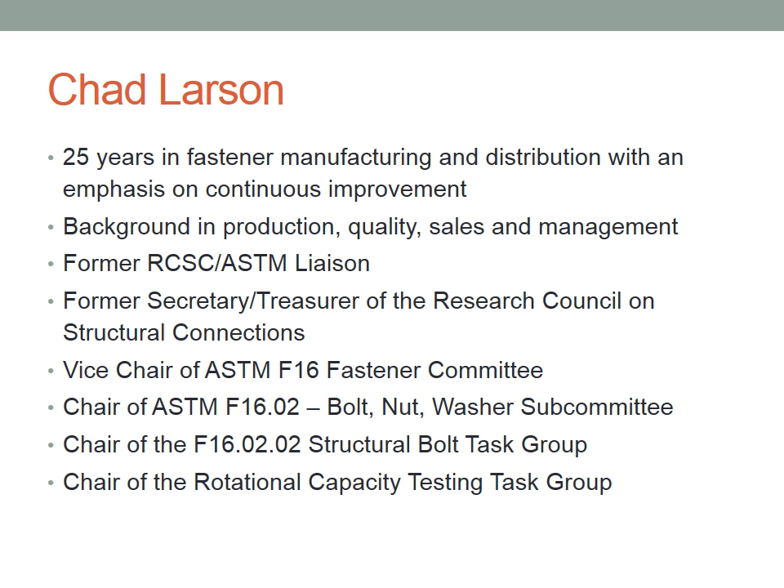It's truly a pleasure to be presenting for all of you today. I will be covering a number of topics today. Here's sort of a list of what we're going to be talking about. And we're not going to be covering a lot of topics.

Bolting is a pretty complicated issue, and most of the things we're going to be touching on are in and of themselves hour-long to day-long seminars to truly understand, but I'm hoping to skip just enough across the surface of these that you can have a chance of coming away identifying areas that maybe you should know a little more about based on your own circumstances, as well as some useful in-depth information on a few important topics as we go along, the items that we tend to see the most issues with as a supplier.

What we won't cover, what we simply don't have time to get into, are some things that you can definitely find information on in other places. As we get to some points of that throughout the presentation today, I'll give you some ideas where you can get that. But certainly there's a wealth of information out there in the form of formal educational programs, all kinds of information on the internet, and all kinds of people that are willing to do additional training to give you more information on any one of these topics.

What I do want to make clear is I'm going to talk about a lot of problems, a lot of potential problems, a lot of things that engineers can put in place to try to avoid having situations arise at a job site. What I don't want you to leave this call with is this feeling of panic from having seen these problems. By and large, we have very few bolting quality issues in the industry relative to the number of fasteners that are used.

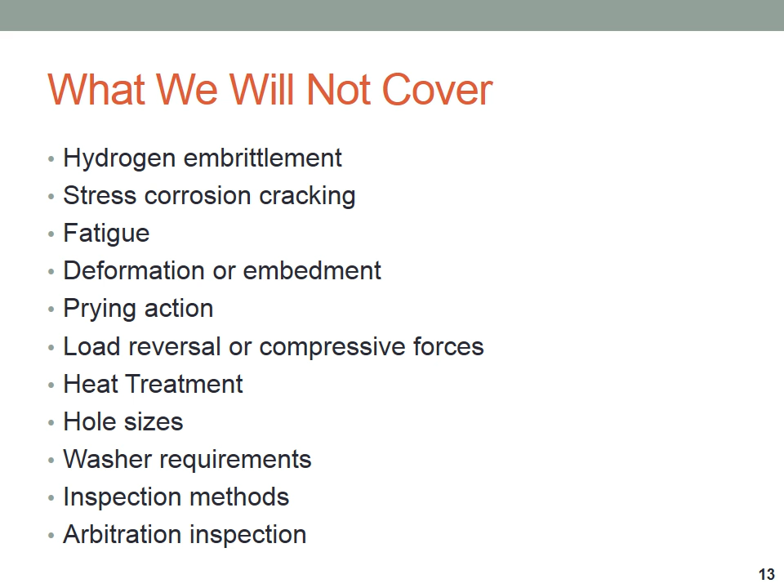There's no need to run from this presentation thinking that some structure you designed is going to fall down. It's simply to give you a better understanding about bolts.

One thing I would recommend, Geoff Kulak, I think 3 years ago, gave a presentation on bolted connections and how forces act on bolted connections. Now that is still available on the AISC website, and I would encourage you after this, if you didn't participate in that, to possibly go out and grab a copy of that. That's some good information that is left out of my presentation simply because it's available there, and I didn't see the need to spend some of our time going over that.

Why should you know some of the things that we're going to be going over today, and what does it matter to you as an engineer? It's my opinion that understanding bolts is really going to help you make more informed engineering decisions up front. Understanding bolts will help make your intentions and requirements clear downstream, clear to the fabricator, clear to the erector, clear to the ironworker. Making informed decisions up front can really help you decrease the likelihood of any problems that might come up down the road.

Key for me in all of this is preventing problems prevents compromise. What I mean by that is buildings go up with problems and they go up without problems. We see situations, not just with fasteners, but throughout construction in general, where things come up and people have to make a determination on whether something is fit for use. It's not often that an owner wants to wait an additional 12 weeks for a casino to open because some special bolt that got ordered was found non-conforming and needs to be reordered and remade. There typically needs to be points of compromise where you need to know at least enough about the subject matter to not feel like you are risking the integrity of a structure by seeing something as being fit for purpose or fit for use. Understanding a little more about every element in your craft is very important to that end objective, and fasteners in particular are one of those little thought of last use items that oftentimes are in situations like that.

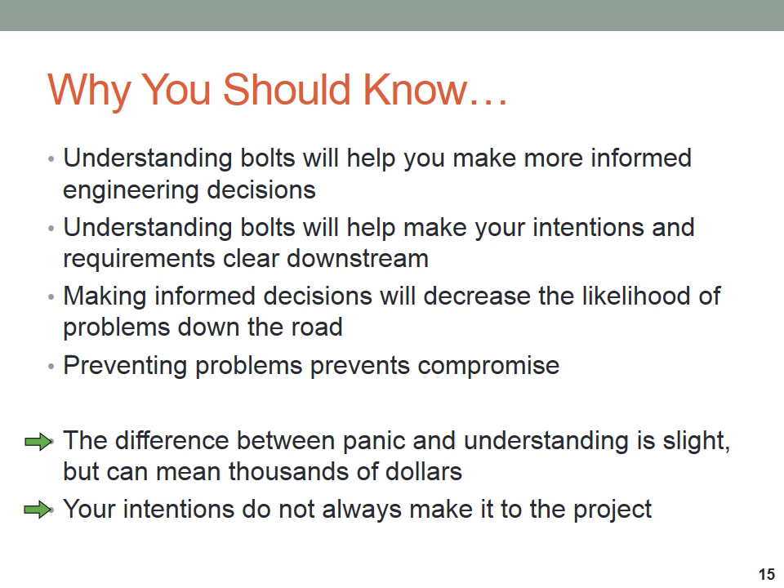I think it's also important to recognize that however good your intentions may be, your intentions don't always make it to the project. Oftentimes bolts get out to a job site with very little oversight, little QC if any oversight. And you need to find ways to make sure that your intents are carried all the way through to the end use of the product.

A little bit about structural bolts and how they work in connections. A bolted connection really takes an army of people: AISC, RCSC, and ASTM. Essentially, components of each of those need to be put together to have a properly designed connection.

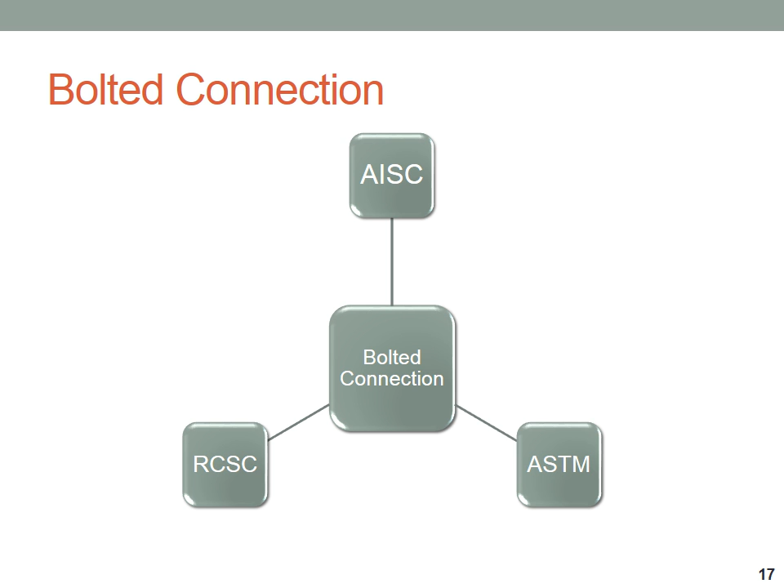AISC, since you all have found your way to this talk and to the website to get information on it, assuming everybody on the phone here is familiar with that, but obviously the American Institute of Steel Construction is sort of the steward for steel construction and responsible for promoting steel construction in our industry.

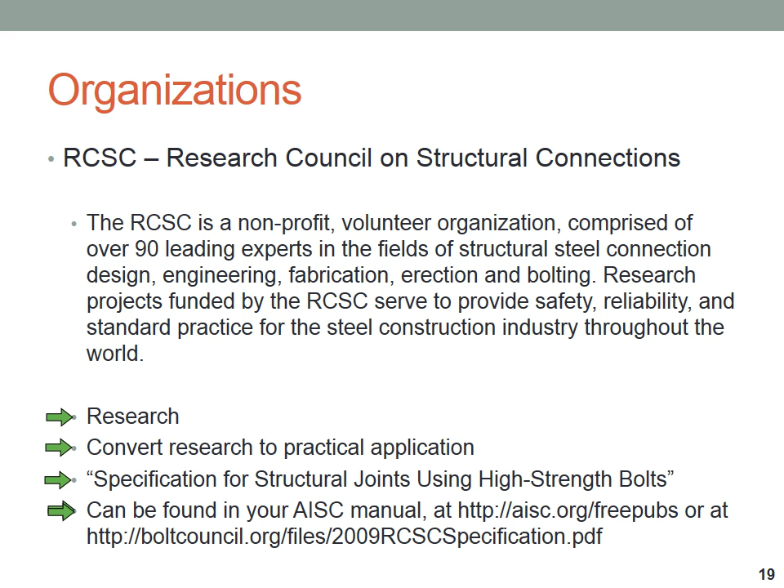What maybe not all of you are aware of is the Research Council on Structural Connections. That is a nonprofit volunteer organization essentially charged with doing research, converting that research to practical application. So it's one thing to have data and information, it's another to make it work in the real world. That committee maintains and publishes the specification for structural joints using high-strength bolts. That document can be found either in your AISC manual, on the AISC website, or on the Bolt Council website. Those links are there available for you.

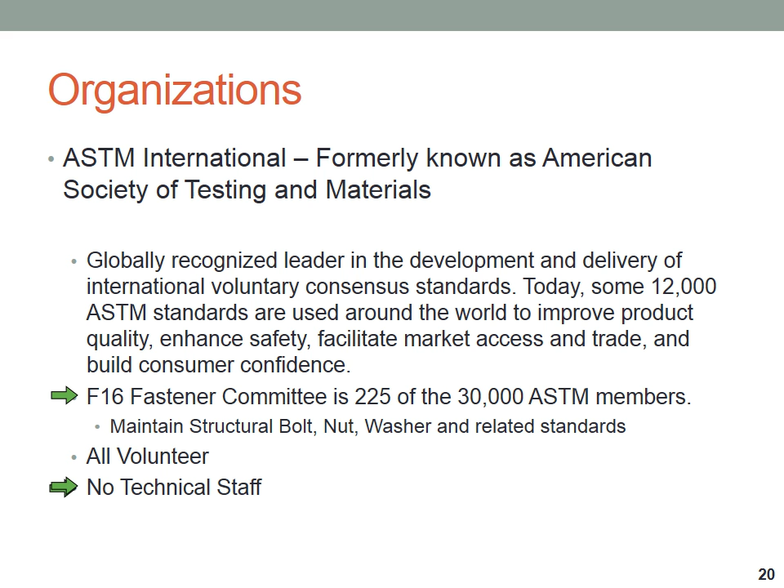ASTM, most of you may be familiar with the term - it's actually called ASTM International. It's really the world leader in the development and delivery of consensus standards. What that means, at least for the purposes of this phone call, is that there's an ASTM committee, the F-16 committee, which is 225 of the 30,000 ASTM members. Those 225 people are essentially all volunteers that maintain the structural bolt, nut and washer standards. It's important to remember, a lot of people don't understand that ASTM, being a volunteer committee, there is no technical staff. They essentially rely on committee members to answer any questions that might come into ASTM.

Recognizing that these are volunteer organizations, recognizing that a lot of needed changes don't happen right away, it's important to recognize that these organizations are never really aligned in real time. In fact, sometimes they are as much as 5 or 6 years apart. If a new coating, for example, gets into an ASTM standard, if it just missed a publishing date for the RCSC spec, it may be 5 years before those are aligned. It's important to recognize that sometimes the industry moves at a pace that's quicker than our standards can keep up with it.

So a little bit about how nuts and bolts are made.

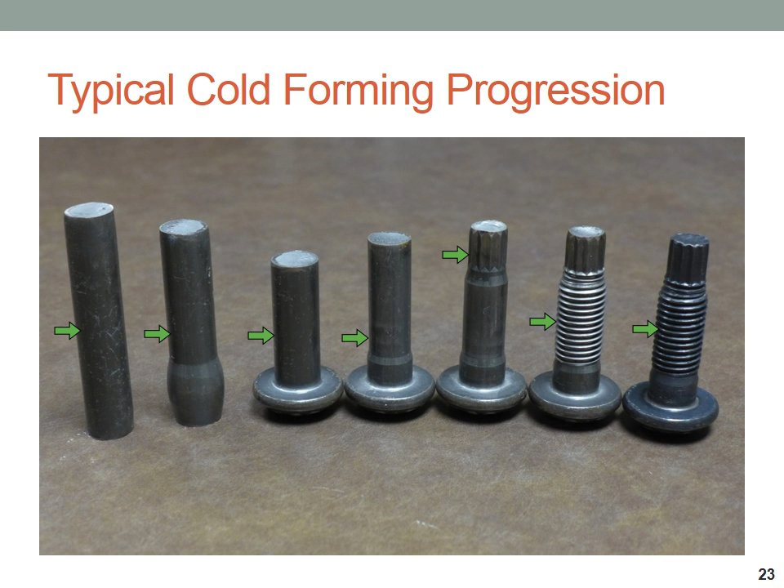Not going to get into a terrible amount of detail here, but I think it's interesting for people to see the process: going from a wire rod or coil to an upsetting stage, to a heading stage, to an extrusion to create a pintail (if needed on a twist-off type bolt), thread rolling, and heat treatment. This is typically done in a cold forming operation, used to make thousands of configurations of parts.

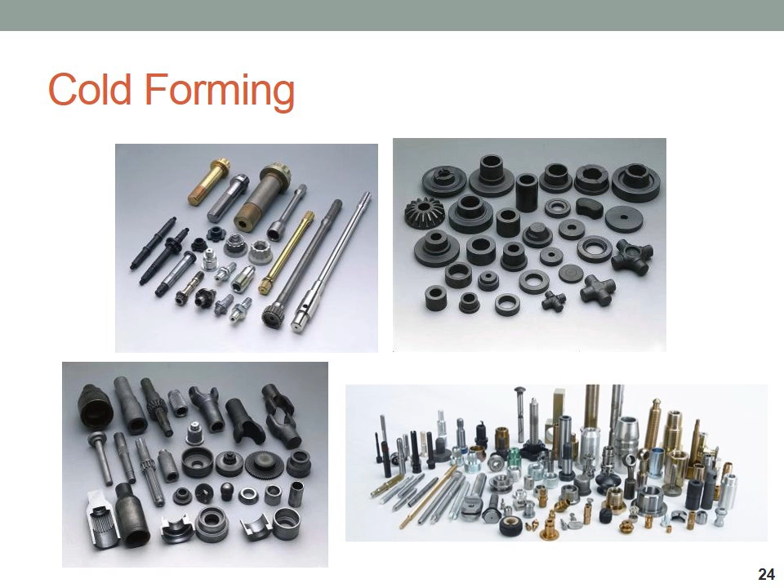The cold forming process may have a few tweaks from manufacturer to manufacturer, but generally follows this flow: from steel coils to an annealing process, to pickling or cleaning and coating. The wire is then drawn down to size, cold formed by heading and typically roll threading, then quenched and tempered as a heat treat process, plated or coated as required, inspected, and then packaged.

It's important to recognize that to really understand cold forming, you probably need to spend a couple of weeks in a class to really grasp it. Inspection in particular has a lot of elements in inspection and quality assurance that need to be well understood. Thankfully, most of your contractors and suppliers are taking care of all of those issues.

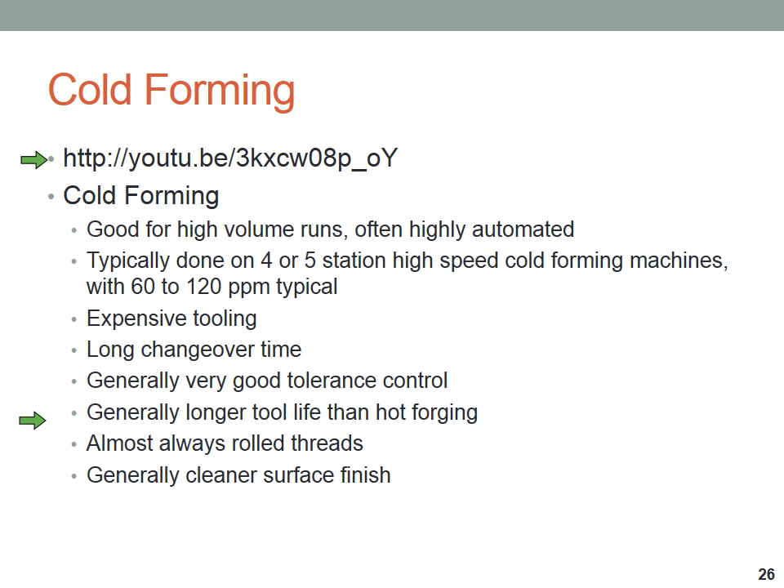This is just a little bit of information on cold forming, what it's good for, and a little bit of information on hot forging, which is very similar to the steps I just showed you outlined for cold forming, but it's done at an elevated temperature at a point where the steel is very pliable and relatively easy to form.

There are advantages and disadvantages to each of these, and without getting into a lot of detail, I've provided some of these for your review. In particular, hot forging is really good for long lengths that don't necessarily fit in machines, or for large sizes that would require a lot of forging pressure if cold.

In most cases, hot forging is a pretty manual piece-at-a-time process, with a few exceptions. Cold forming, on the other hand, is a very high volume automated process.

The thing to recognize about hot forging is sometimes those bolts are made from blanks to speed delivery. What I mean by that is a manufacturer may make a 1.5-inch diameter by 2-foot long blank, and as orders come in, they can cut inches off of that and then thread the part to meet certain delivery requirements without necessarily having to set up to make every specific length.

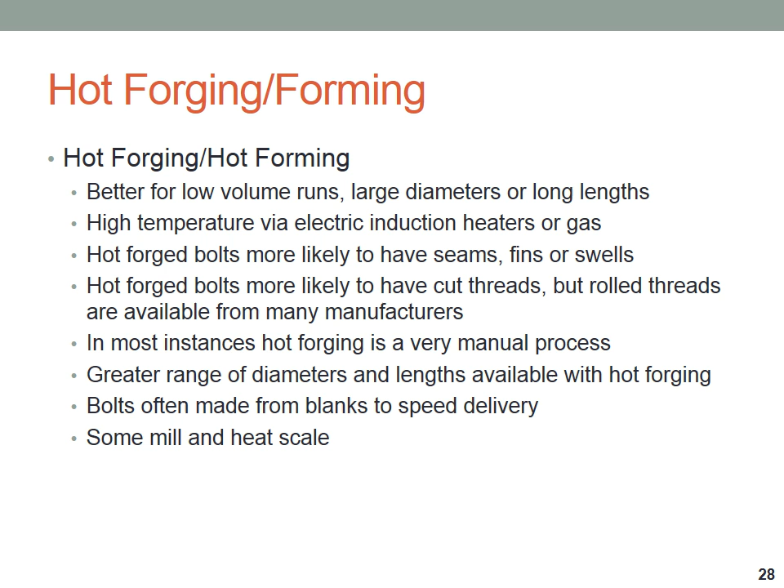Threads are formed in two ways, typically thread cutting and thread rolling. Thread cutting is self-explanatory, typically done with a chaser or almost a lathe type of setup. Thread rolling is done with two dies that have the profile of the threads included, and basically under very high pressure, they roll the threads into the bolt, so there's no cutting.

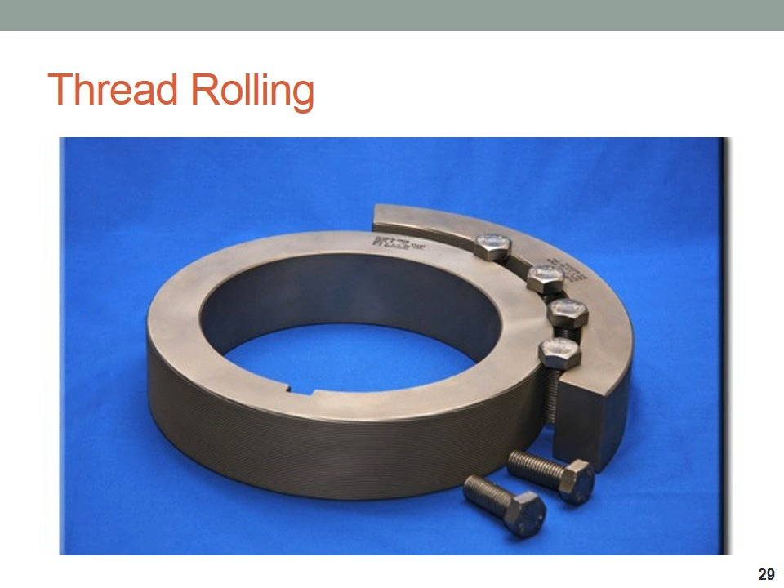There are some advantages to thread rolling. There's a little bit better strength because of the cold working, and the grain flow is maintained rather than cut away.

Nuts are made similarly. Here's a picture of a progression that shows nut forming. Typically in structural bolt sizes, all of the diameters of nuts would be what we call hot formed, again at very high temperature, with a cut-off blank, an upset, a partially formed hex shape, a pierced blank, and then a tapped final product with heat treatment, depending on the manufacturer, going on at different stages throughout that process.

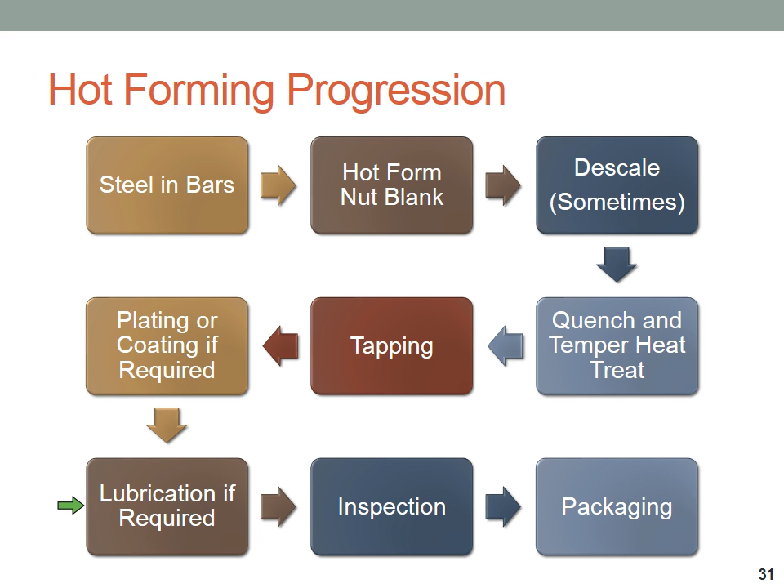The progression for hot forming is very similar to cold forming, including a couple of different steps, possible descaling depending on the end use of the product, but the same process for quench and temper, tapping rather than rolling, and plating, lubrication. We do have specifications that require lubrication in a number of cases for structural bolts, so that's one of the key components to nut manufacturing.

As far as bolts go in general, beside how they're made, there are some universal thoughts on things that you should understand about bolting. Here are some basic terms that I think most of you are familiar with, including clamp force.

Elastic interaction is the way multiple bolts in a joint interact together. As you tighten one, the ones around it loosen. A good example is putting the wheel nuts on your car. You go around and tighten them once, then come back to the first bolt and it's loose. That's an interaction between all the fasteners in the assembly, and for us, that mostly happens during the snugging process.

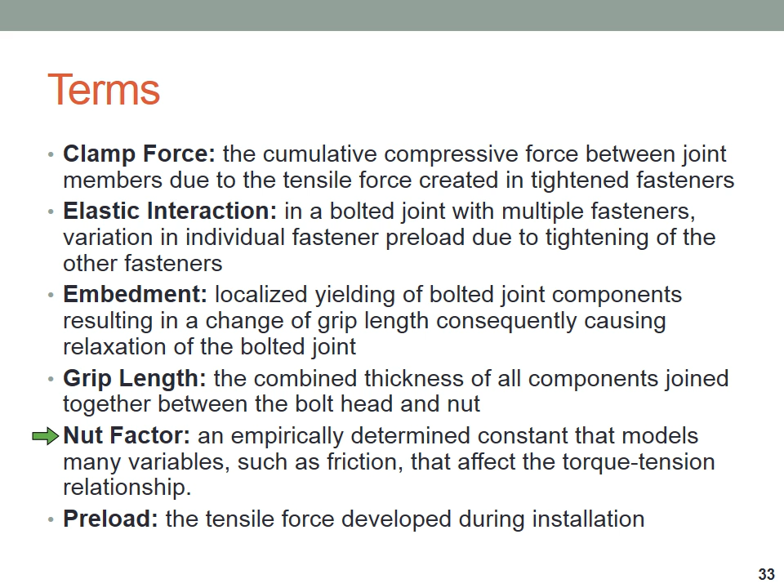There's a couple of things I'd like you to take away from the talk today. In particular, just understanding the curve. I think you've all seen at one time or another stress-strain diagrams on different materials, including fasteners. Understanding the curve is really essential to understanding how fasteners work, and understanding threads is essentially how fasteners function and maintain their strength. Those are a couple things I'm really going to try to drive home today.

Bolts typically function very much like this stress-strain diagram, where we've got stress and strain. What we call the linear range, or elastic range, is the tension we can reach in a bolt up to the yield point, or the point where it deforms plastically and permanently. In this elastic range, at any point along this line we can tension a bolt, release the tension, and it will go back to its original length.

We could bring a bolt all the way up to its proof load, or a typical clamp load, relieve the tension, and it would go all the way back down to its original length. Some structural bolts are installed in that elastic range, but a very large majority of them, particularly bolts installed using the turn of the nut method, are actually pulled well up into what we'd call the plastic range, meaning there's some permanent elongation. It would be very typical using turn of the nut to bring a bolt all the way up to the peak, or ultimate tensile, possibly even farther.

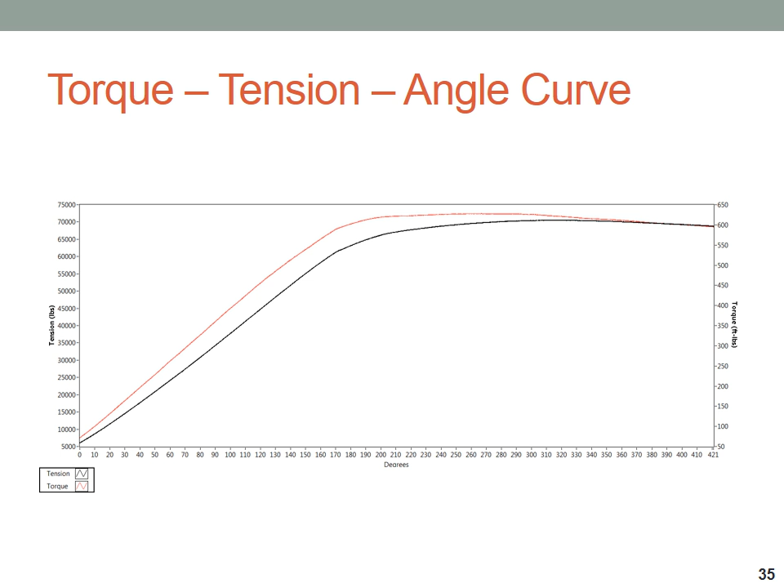There's a lot of information we can gather by doing a torque tension angle curve such as this. And the technology we have today allows a lot of people to look at that information, not quite in real time in the connection, but certainly in fastener testing.

Some bolting basics you should understand: nuts should always be stronger than bolts. That's sort of a universal truth. The reason is we prefer that bolts fracture rather than strip. Stripping is a condition that could happen in a connection, and you wouldn't necessarily know you had compromised it. Tensile failure is sort of immediate and in your face, and it at least tells you something has gone wrong.

Generally speaking, the more bolt threads there are in the grip, the better. Bolts are essentially very stiff springs. Most of the stretch that occurs in a bolt under high tension is in the area of highest stress, or smallest diameter, which is in the threads. As a bolt is tensioned, most of that stretch happens in the threads. If you haven't left very many threads within the grip, you're relying on that small number of threads to do an awful lot of elastic stretch, and sometimes they don't have the capacity.

Generally, we like to see more threads available within the grip in a well-designed bolted connection, but structural connections are unique in that they have design considerations for keeping threads out of shear planes, and therefore keeping threads short. The thing to take away is, if you're trying to detail a bolt length and deciding whether it's better to have two or three threads sticking out or only two or three threads in the grip, honestly move the nut out towards the end of the bolt if you can and leave more threads in the grip. It'll generally provide for better bolting performance.

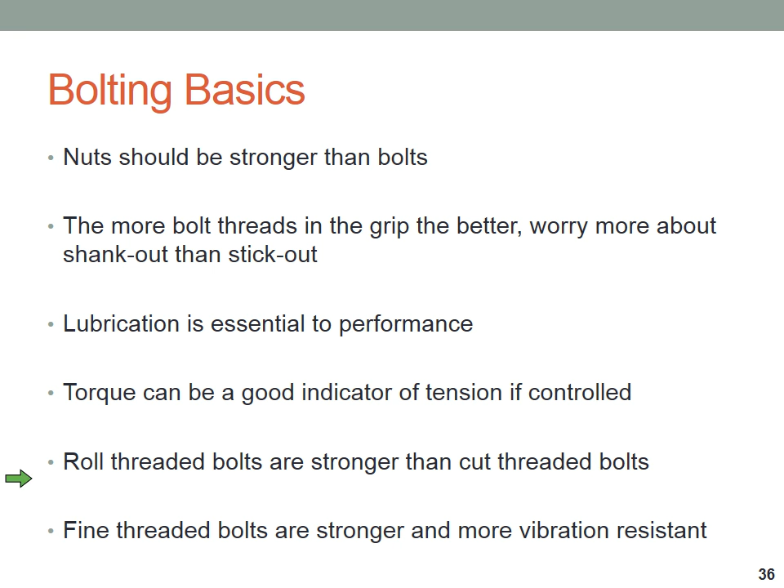Rolled threaded bolts are typically stronger than cut threaded bolts. Fine threaded bolts are stronger and more vibration resistant than coarse threaded bolts.

Large diameter parts are more difficult to heat treat properly. When we get up around 1.5 inch, 2 inch diameter, it's sort of like cooking a really thick steak. It's hard to properly heat treat a part because it cannot quench at the same rate, so the core of the part tends to be much softer in hardness while the outside tends to be much higher in hardness, making it difficult for the part to uniformly distribute load. We tend to get a little nervous as parts get larger, because they become much more difficult to heat treat, and heat treat is essentially what gives us all the properties of a fastener.

For large diameter fasteners, you also have to consider that they're typically hot formed, and those can come with die fins and some tooling marks. Long bolts can be difficult to keep straight through the heat treating process. If you're trying to get through 18 inches of steel with a 1/16 of an inch oversized hole, sometimes that can be tough with really long bolts.

Another universal truth for fasteners is that most of the stress in an assembly is on the first few nut threads nearest the grip. That's just how the load is distributed. It's important to understand that many quality problems are a result of heat treatment and thread fit, and that's why we typically spend so much time in the fastener world talking about that.

As I mentioned, torque can be valuable, but it's complicated. It's a great means of fitting up and snugging structures. It can be accurate when it's controlled.

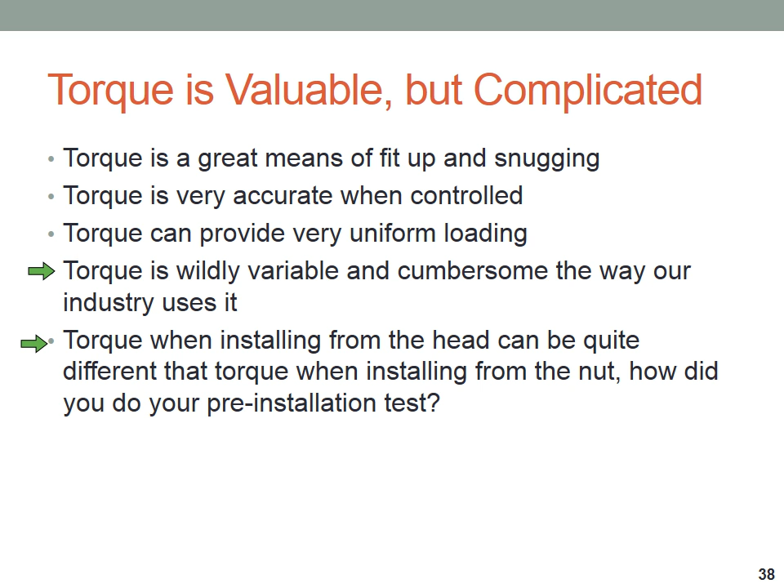It can provide for very uniform loading, in particular, again, in the snugging process. It is, however, a little bit wild and variable in the way that our industry uses it. Sometimes we have bolts, nuts, and washers from different sources showing up at a job site, and we truly don't know what's going to happen to torque in that situation. And torque when installing a bolt from the head can be quite different than torque when installing from the nut side. So it's important to recognize that.

Threads are very important. Obviously, without threads, fasteners are pins, right? It's what makes nuts and bolts work. And it's important to have a little bit of an understanding of how screw threads function. There's actually over 120 different elements to screw thread design. It's incredibly complicated. Thankfully, our standards allow us to ignore pretty much all of those, but there are a few things that are important to understand.

Inch series structural bolts are always what we would call a unified coarse series of thread and a class 2A tolerance. As I mentioned earlier, threads do not load evenly, sort of like very long connections. Threads tend to be loaded from the grip out as the bolt starts to stretch. The threads closest to the grip get a disproportionate amount of the load, and it's important to recognize that and what effect that has on design.

Rolled threads can be 5 to 15% stronger depending on the grade of the fastener, but cut threads can easily meet specifications. So don't be afraid if somebody has supplied your project with bolts that have cut threads. They can more than adequately meet the requirements.

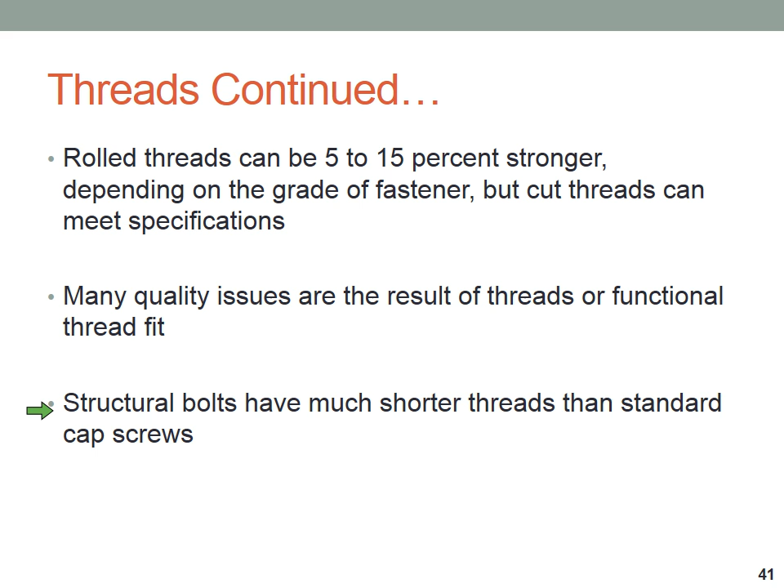Many quality issues that we run into as a supplier are the result of threads or functional thread fit. And what I mean by functional thread fit, it's one thing to have a thread that is perfect coming off of the machine. But after it goes through different coating operations, gets handled, gets dumped out at the job site, thread nicks, coating thickness, things like this tend to have an influence, and we see quite a few problems coming from that. It's also important, as I said, structural bolts have much shorter thread lengths than cap screws.

The root is essentially the bottom of the valley in a thread form. The flank is the side of the thread, either side. The crest is the top. The minor diameter also generally equates to what we would call the stress area on the fastener. The major diameter is often very similar to what we would call the nominal diameter, but not always equal. Thread angle: all of the UNC fasteners that I talked about are 60-degree thread forms.

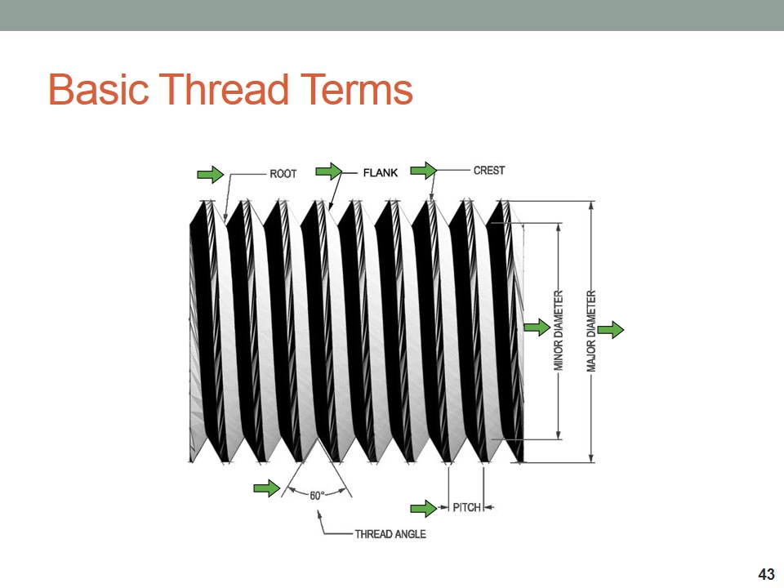And the pitch. The pitch is something that we're going to spend a little bit of time talking about because there's a lot of confusion on what thread pitch is and what thread pitch diameter is. There's a little bit of confusion. So as this slide comes up, pitch versus pitch diameter. In the bolt and nut world, we use pitch diameter a lot. Pitch is very simple to understand, pitch diameter not so much. I'm going to try to explain pitch diameter, but to be quite honest with you, a lot of people in the fastener industry don't understand it. So I'm going to try to explain it in as simple a way as I can.

Pitch is simply thread spacing. So if you ordered an inch series 7/8-9 by 2, that -9 means there are 9 threads per inch, and that is the spacing of the threads. There are, as it implies, 9 threads per inch of length. Metric fasteners do it a little bit differently. They would use an M22 by 2.5 by 40. In that case, they don't do threads per centimeter, for example. They do 2.5 millimeter as the spacing in between threads. So the top of one thread form to the top of the next thread form is the spacing.

Examples then are unified series fine, unified series coarse. You can have the same fastener with a fine thread of 14 per inch or a coarse thread of 9 per inch.

Pitch does not equal fit, however. Implying that pitch equals fit would suggest that you could put any diameter of bolt on any fastener that met the same pitch. A very simple example of that is you cannot put a 1-inch 8 nut on a 2-inch 8 bolt. It simply doesn't work, even though they have the same number of threads per inch. It's very obvious why it doesn't work, and yet you can get each of those in an 8 thread per inch variant.

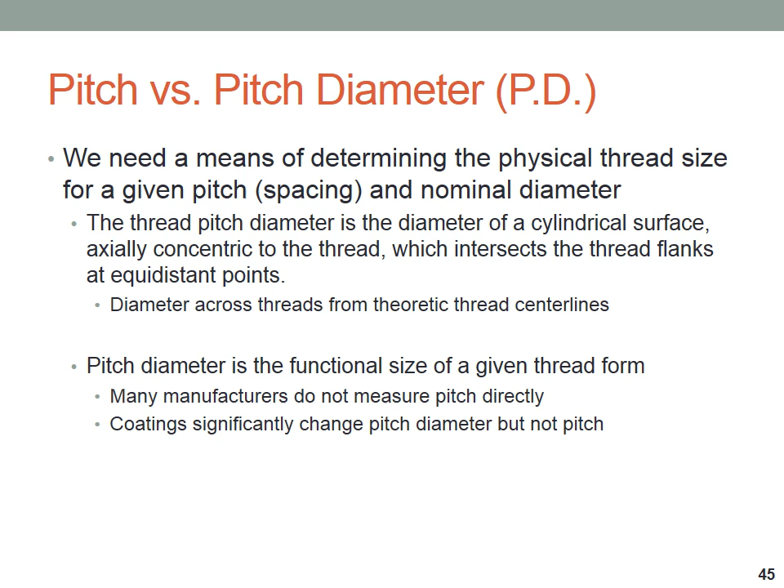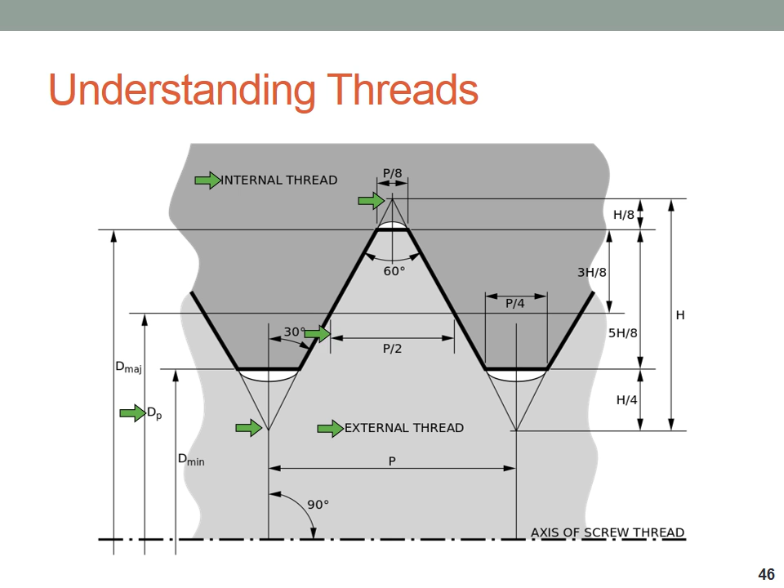Back to this drawing that I had, in this particular case, the pitch diameter, again, is the center line. If you took an equal distance between the theoretic top and bottom of that 60-degree angle, this pitch diameter is a line that travels through the center of that. In this case, though, you can see it's neither the center of the external thread nor the center of the internal thread. It's actually just the center of the theoretical center of those.

Now to measure that, keeping in mind that threads have a helix angle to them, or a screw form to them, in order to measure that diameter, we're essentially trying to measure the distance of these 2 points on a crest, or on a mountain I'll call it, across to the other side 2 points on a valley. The dimension from that point to that point across is what we call a pitch diameter.

And why that's so important to fasteners is we use in the structural industry a lot of fasteners that are coated. These coatings, while they cannot change pitch, imagine hot dip galvanizing a bolt, you don't change how many threads per inch they are, but you drastically change how that bolt and nut interact with each other, and that is a function of the pitch diameter.

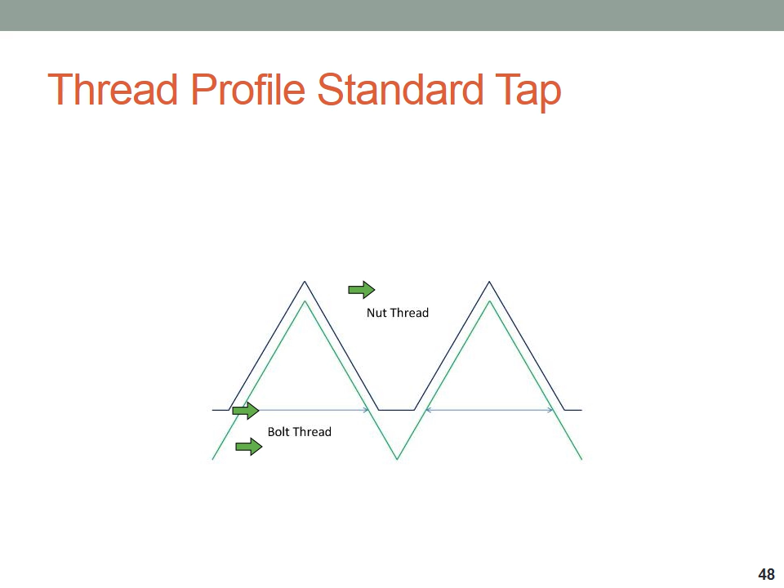Essentially, the strength of the bolt thread then is the cumulative area across this bottom portion of the triangle as it wraps around the threads on the bolt. And so that essentially is the stress area of the thread.

Now, when we add coatings, they have a significant effect, because if you can picture measuring coating on a plate, for example, if you add coating thickness, it has a one-for-one relationship. The coating thickness is the coating thickness. If you add coating thickness to a cylinder, the effect on your cylinder is double the coating thickness, because you're measuring it on both sides.

Since we measure pitch in 4 places, the effect of a coating on a fastener is that it has a 4-to-1 multiplier on the thread fit. In the case of something like mechanical galvanizing, where we are coating both the bolt thread and the nut thread, it actually has an 8-to-1 multiplier. So what starts out as a relatively thin coating, we have to multiply that thickness times 8 in order to come up with its effect on thread fit, and that can be significant.

If you've got a notebook in front of you, many of our coatings are approximately the thickness of a sheet of paper.

That in itself doesn't seem like much, but if you put 8 sheets of paper together, that's the cumulative effect we encounter trying to mate coated bolt and nut threads, and it's important to understand. Here's an example of going from the old nut profile to what we call oversize or overtapped nut thread, to accommodate those coatings. So forget that blue line and look at it with an overtapped or oversized thread, which is typical of virtually every coated fastener we use.

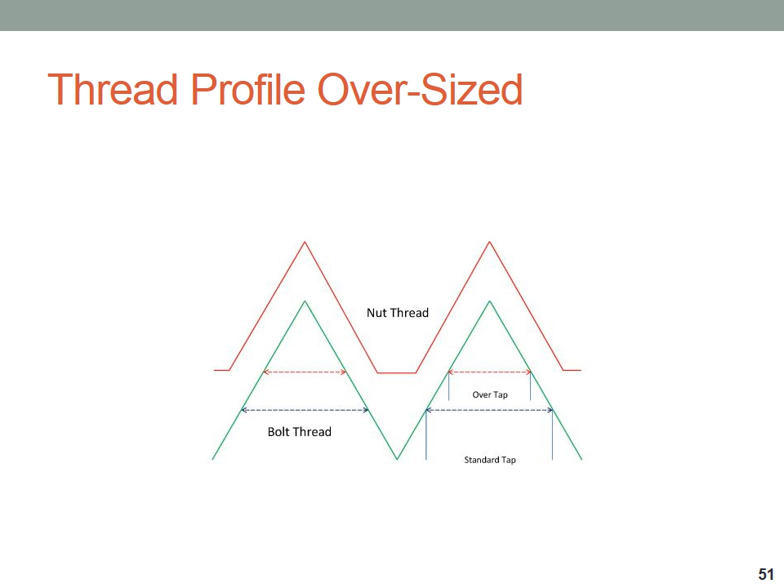As an industry, we don't have a lot of history with oversizing higher strength nut threads and the effect that has on an A490, or what you guys would call a Group B equivalent fastener. We're still sort of learning a little bit about that.

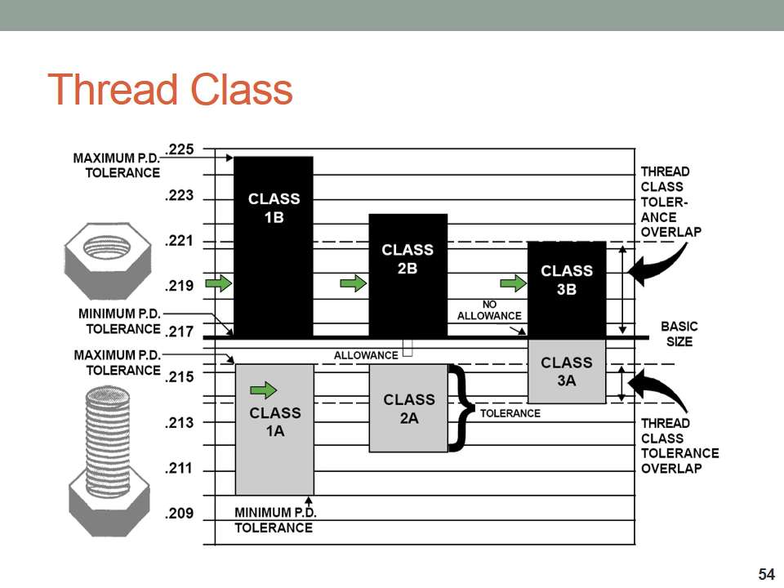I mentioned that fasteners are a 2A, 2B fit. Not going to worry too much about that today, other than to understand there are different thread classes. There are very tight tolerance threads, a 3A, 3B fit, a sort of mid-tolerance fit used on structural bolts, and a loose tolerance, which really isn't used on much of anything anymore. It's also important to understand that these overlap, so even using very simple gauging, sometimes if you measured a thread form you couldn't necessarily tell if a dimension would qualify as a class 1A, 2A, or 3A. What's important to take away is that it's sort of a mid-tolerance, not super well controlled, but somewhat controlled thread form.

Thread lengths, while we like to think they are all equal, it's kind of funny that thread length is not a controlled dimension typically on bolts, at least not on structural bolts. We control the body length, a minimum body length for a given length of bolt, and we control the overall length. We control the transition length, the area in between the full body and the fully formed threads. Honestly, the threads are whatever is left, and that number can vary a little depending on manufacturer's tolerance. For you as engineers, it's important to understand the minimum body length and what effect that might have as you design connections that are either shearing through or not through thread planes.

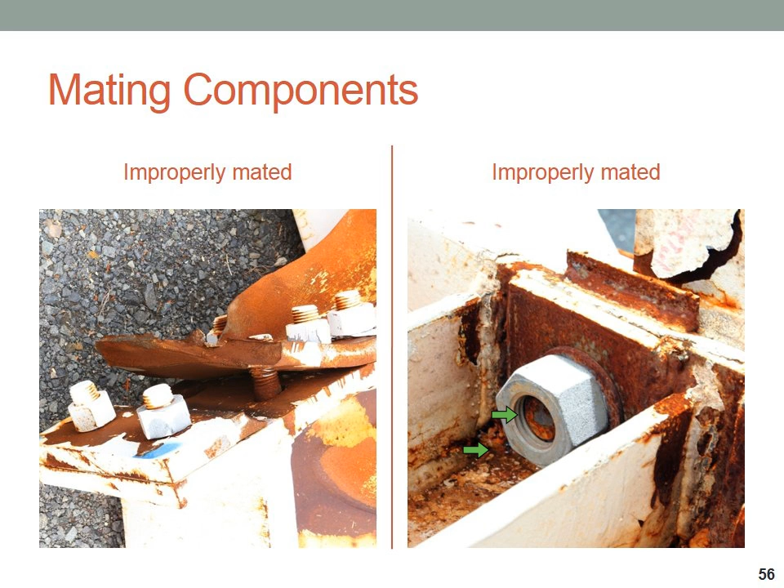Shear. I think pretty much everybody on this presentation is going to understand when we talk about shear.

When you're doing your connection design, one of the first things you look at when designing a shear or bearing connection is whether or not you've got threads in the shear plane. Sometimes it's very simple. In fact, sometimes you can just put your bolt in a connection the opposite direction and increase the shear capacity, because you can get both shear planes to fall on the body instead of one shear plane falling on the threads.

If you have a connection like that, it's super important to make sure that follows through. You may be designing this beautiful structure with all shear and bearing connections, and you've done that so you can stay away from pre-installation testing at the job site. But all of this happens: you send these bolts out and the iron workers put them in the wrong direction, and now one of your shear planes falls into the threaded area rather than on the body.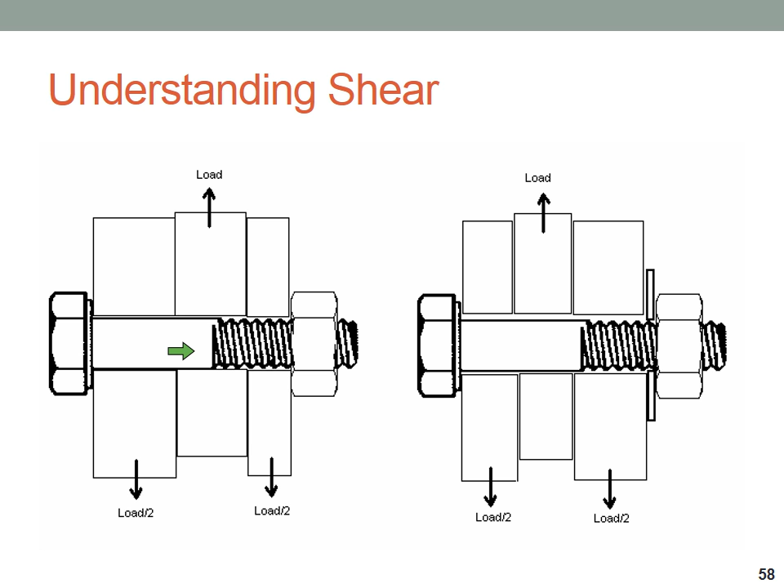It's important to recognize that, and again, make sure those requirements carry all the way through. When you design your connection, you have to stop for a second and think, now what if somebody puts this in the other way? Where does that shear plane fall? And whether you need to provide direction on where those threads need to absolutely be so they don't get put in backwards. Sometimes they'll get put in backwards just because of assembly or installation clearance. The iron workers feel they have no choice, and without knowing the difference, they'll spin it around and put it the other way.

Again, understanding shear, we name bolts things like A325N, A325X. Sometimes that's not understood when it gets to the distributor because it's really a design call-out, not a bolt call-out. The bolt will be exactly the same. The difference is that in an X type, the threads are excluded from the shear plane, and in an N type, the threads are included in the shear plane.

Lubrication. This is one of the things that is really important to fastener performance. We don't require it in every case for structural fasteners. I could make an argument that it should be on every structural fastener, but other people could argue that it's a waste of money and not necessary.

To understand lubrication, we have to understand a thing called K in the fastener industry. I need to be a little careful—there's a K factor within steel design, and there's a K factor within fastener design. Some people call this a nut factor, some call it a friction coefficient. The important thing to take away is that K is simply a way to define the relationship between torque and tension. If we can define that, we can try to make it repeatable, coming up with lubricants or coatings that give us a consistent torque-to-tension relationship. K, however, only works within the elastic range. Once a bolt has gone beyond yield, we can't really use it anymore, so it can only be measured before permanent stretch.

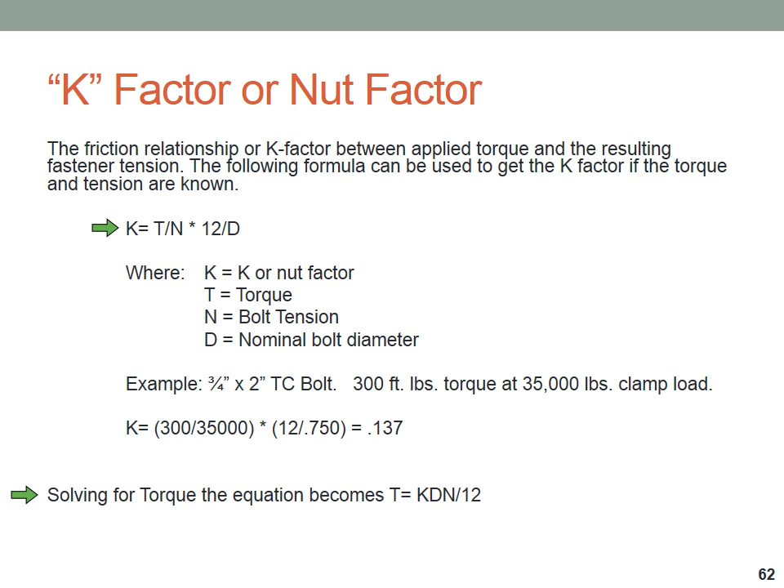The reason I bring this up is we get questions pretty much every week, and I'm sure AISC gets a lot of these too, like what torque should I install a 3/4 by 4 inch bolt to? We sort of laugh because in the real world we have lubricants and coatings that are down as low as a 0.09 K factor, and we have dry bolts out of the keg that have had most of the oil drip off. We typically, on any given fastener assembly, could see anything from a 0.09 to a 0.25 K factor on any given day. What does that mean for torque now?

If we apply that math to reach minimum tension on a 3/4 inch bolt with, let's say, a Dacromet coated assembly with a supplemental lubricant, which tends to be very slippery, I could actually by hand reach minimum tension with a spud wrench on a 3/4 inch bolt with a very low K factor, an effective lubricant. But it could also take as much as 470 foot-pounds to reach the same tension with a dry bolt, nut and washer. So it's really impossible—this is why we worry so much about torque in this industry and how variable it might be, since any of those are possible with any given fastener assembly depending on the condition it's in.

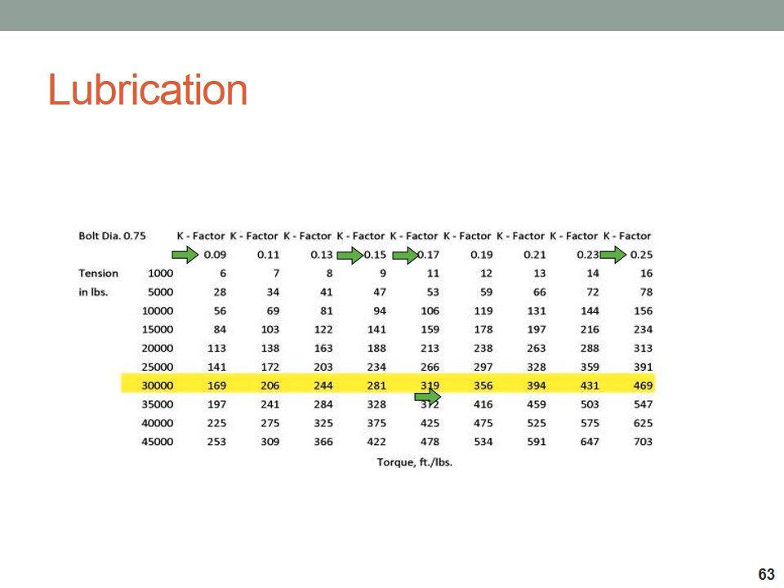Other industries that are a little farther along than ours—Japan, for example—actually sell all of their structural assemblies as matched sets in different categories. One of those requires the assembly to be between a 0.15 and a 0.17 K factor. In that case, you can use torque in a pretty reliable manner because there's really not that broad of a range when that K factor is controlled. It's when we don't control it that's a problem.

Another way of looking at this is that decreasing friction, or increasing the effectiveness of a lubricant, decreases the effect of torsional stress on a fastener. And torsional stress can cause fasteners to fail at a much lower level than they would without that torsional stress.

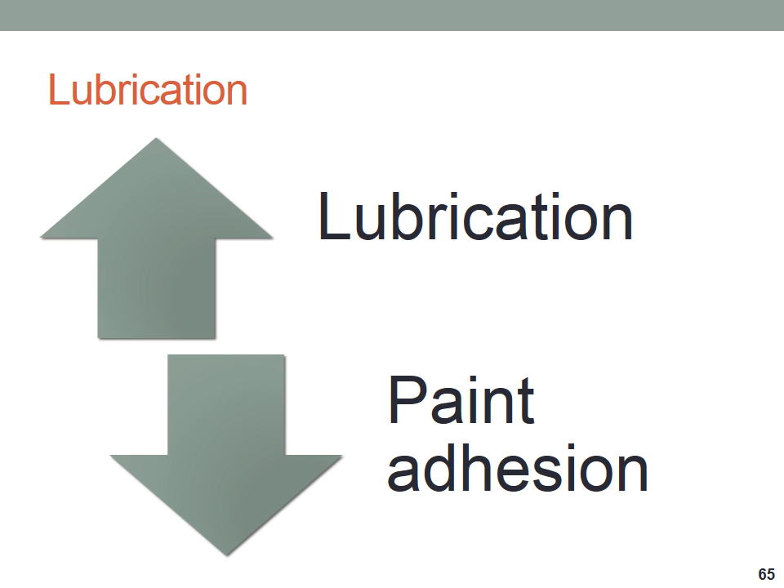One of the problems with lubrication is the better the lubrication gets, the better it is for the performance of the fastener. Unfortunately, a lot of our structures get painted, and the better these lubricants are, the harder they are to remove and the more resistant they are to paint. So there's some very practical considerations if you just wholesale enforce the need for lubrication on your fasteners to get better performance. You need to recognize that someone's going to pay for that later on, possibly the painting contractor coming back asking for additional money because he didn't realize how hard it would be to paint that structure.

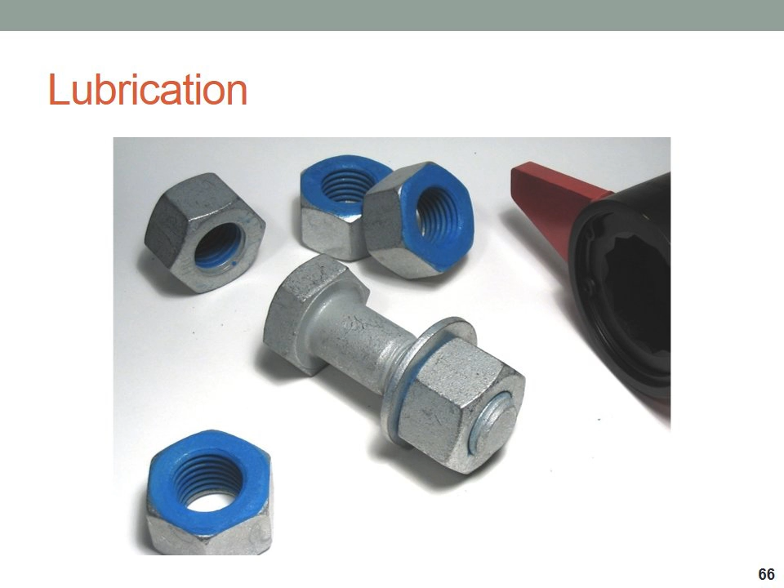Thankfully, almost every industry has a solution. There are a number of people supplying lubrication now. The 563 nut specification now recognizes this type of lubrication where it's on one bearing face and the internal threads only. This allows you to specify lubrication for the performance of the fastener, but it also makes the fastener very easily paintable, essentially the same galvanized finish on the nut as you would have on the bolt. This has taken off in recent years. It's been around for probably 10 years, but not that many people are aware of it.

Now down to bolt selection, the structural bolts themselves are broken up into strength groups. I consider them 120 and 150 KSI families. The AISC refers to them as Group A and Group B. This is sort of how they shake out if you look at them in terms of just minimum tensile.

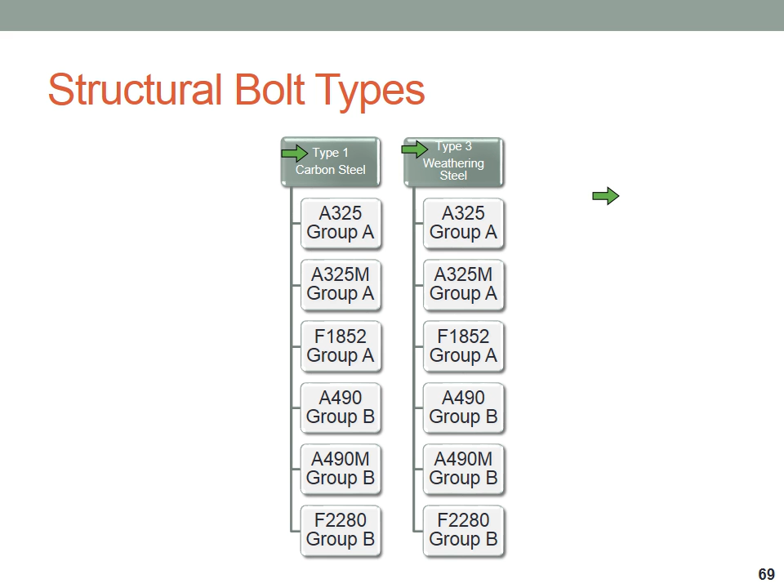But we have other ways of looking at it. If you're building a bridge, for example, that's using Type 3 steel, we can also separate these by raw material type 1 and type 3. You can see that most of those Group A and Group B variations are available in either of those types of steel, but it complicates whether you're looking at strength or raw material as a first step.

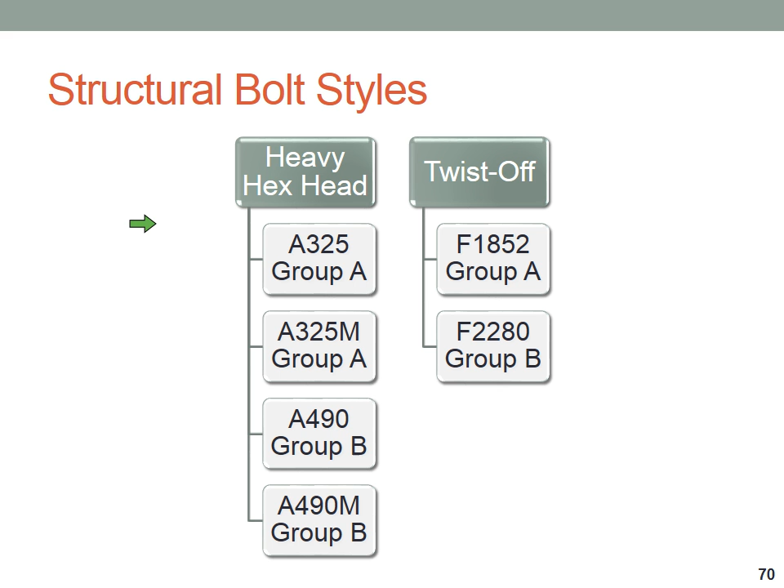You can also look at them by style. If you are going to install heavy hex heads or twist-off type bolts, there are varieties of each of those. Typically this is a decision that sometimes comes from the bottom up. It comes from the erector or the fabricator saying, hey, we'd like to use this particular style.

Sort of like the lubrication trade-off, as strength goes up, we tend to lose ductility. Ductility is a good thing for structural fasteners, so you have to balance things out. Sometimes the design requirements are the design requirements and you need the highest strength you can get. But quite honestly, the lower strength level fasteners are widely available. If you have a problem, they're pretty easy to replace. They're very ductile, and we like ductility in our structures. We like a lot of bending and twisting and moving before things fall down.

There are more coatings available, and there's generally less risk—by that I mean a lot of different things, from hydrogen embrittlement to quench cracks. But if you absolutely need the strength, that higher strength level Group B fastener is really the only way to do it.

It's important to keep in mind that these are specified minimums. Most 120 KSI or Group A fasteners nearly meet A490 or Group B tensions or clamp loads if used appropriately, and they certainly come close to meeting their tensile requirements as well. So there tends to be a little higher safety ceiling in terms of exceeding minimum requirements with the 120 Group fasteners.

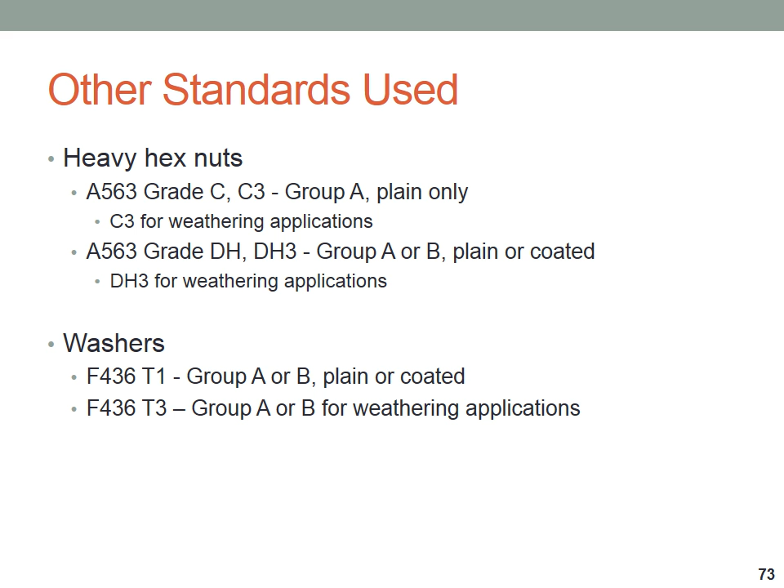Other standards to be familiar with: the heavy hex nuts, A563 Grade C and C3 can be used on the Group A plain only—the C3s are for weathering. The A563DH is the most common structural nut; those can be used on A's and B's, with the DH3 for the weathering equivalent. And of course the washers, F436 Type 1 and Type 3, are used on both Group A and B for plain coated and weathering applications as listed. We sometimes reference some other standards.

A449 and A354 are referenced within our structural bolt specification. Some examples of when to use them: if for whatever design reason you need a countersunk head, if you have thick plies that need to be pulled together and you don't think the standard thread length might be enough, if you need larger than 1.5 inch diameter, or if you need a coating that is not specifically permitted by A325 or A490. These are good opportunities to use A449 and A354.

One thing you should be aware of, though, is that A490 will send you to A354. And then when you get into A354, there's a couple little notes in there that you have to read to really understand. Basically what it says is that while the reference would make you believe it's a direct equivalent, it really is not.

When you order a 354 in place of an A490, a good supplier will ask you if you want heavy hex instead of standard hex, because a 354 would not be a heavy hex by default. You should consider specifying a max tensile, because there's no max tensile strength in 354 like there is in 490. You should consider specifying carbon decarb testing, which is not a requirement of 354, but it is of A490. You should consider specifying magnetic particle testing, which is a requirement of A490 but not A354.

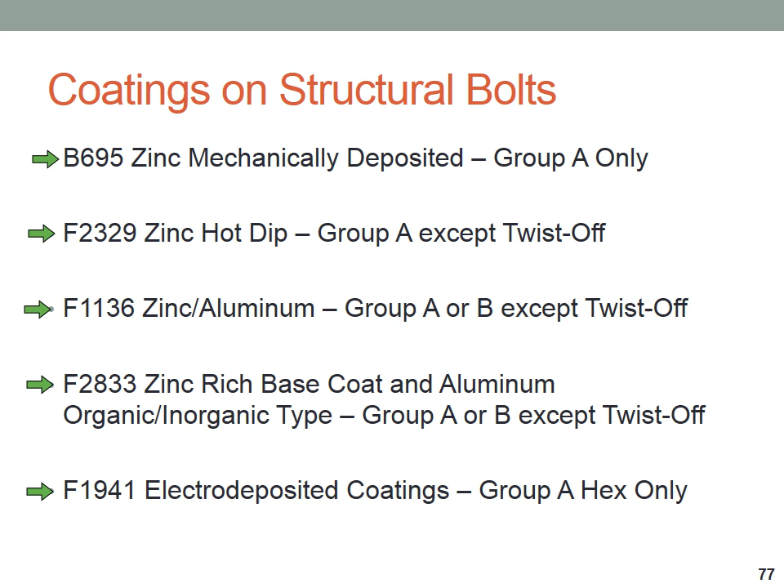There's a virtually unlimited number of other possible coatings for the Group A fasteners. There is at least one other coming through the balloting process for Group B fasteners. It's important to keep in mind with these coatings that they are not always done by the manufacturer. Distributors around the country are not sitting on every possible diameter and length in every configuration of coating.

A lot of times they're sitting on plain fasteners and they send them out and get them coated when a certain project comes along. Assuming that they know all of these things we've talked about, thread fit and the effects of K-factor and supplementary lubrication, is sometimes a pretty big step. So it's important for you to understand what you should be looking for in order to pass that on. Again, keeping in mind that these coatings can have a significant effect on thread fit and on the K-factor.

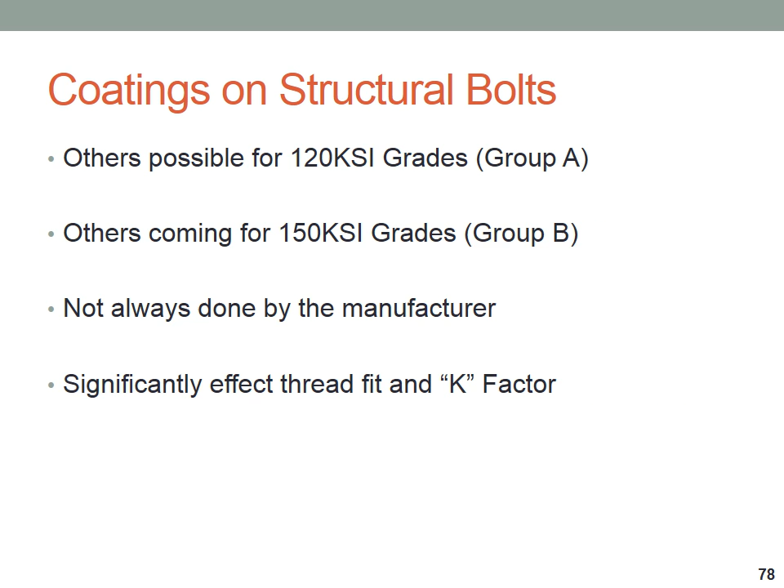Another thing to understand about coatings: thickness is only measured on significant surfaces. In the case of a bolt, that would be the head, typically on the flats or the top of the head. We don't really try to measure coating thickness within the threads.

Coatings are not typically corrosion tested on a lot-by-lot basis. A lot of engineers over the years have said, well, let me see the salt spray test results on this. Typically that is done at the process level or proven out by the platers, and it's very rarely done on a lot-by-lot basis. And one of the reasons this doesn't happen is some of these salt spray tests can take 14 days or longer.

There's oftentimes only 14 days of delivery available by the time an order is placed and when it needs to be in a connection. And so for the most part, those tests are done on sort of a production level basis, not on a lot-by-lot basis.

Hot dip galvanizing is on external threads only. The internal threads of a nut are actually tapped after coating, and you basically have bare exposed metal on the internal threads of a nut when parts are hot dip galvanized.

That's simply because the coating is too thick and pools too much in the threads, and the oversize required to accommodate that thickness would not allow the threads to develop any strength. Really important to recognize is that the industry has yet to establish any oversized tolerances or limits for these new coatings on A490s, so everybody's sort of flying along with their own recommendation at this point. We're working on that in ASTM to standardize that, but that work has not been done yet.

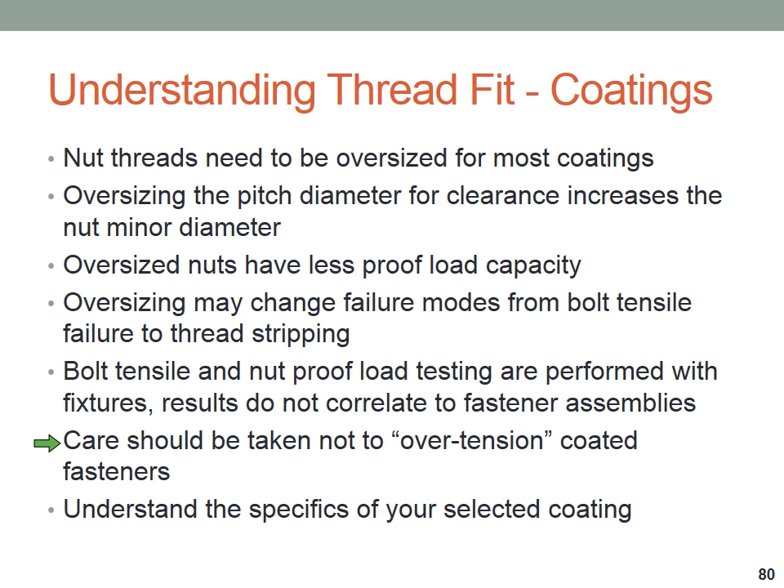Extra care should be taken not to over-tension coated fasteners. This is really hard to define, because our industry has always said if you didn't break it, it's not too tight. But we're starting to see some things with coated fasteners that I'll explain in a second that I think you should understand.

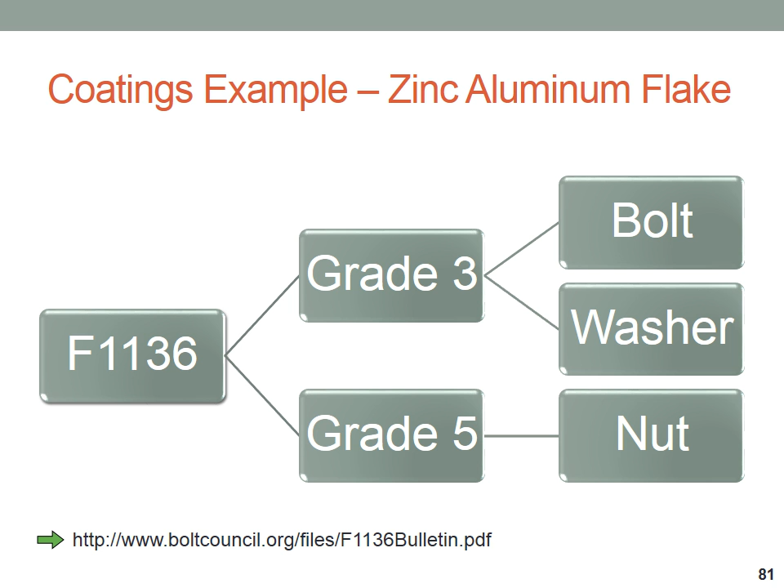Some things to look out for or consider while we wait for our specifications to catch up: one important thing to remember is that coatings are not elastic. We know that bolts are elastic and stretch back after a certain amount of load.

This is an important consideration, and you really should think about putting controls in place to make sure bolts are not excessively tensioned when they're coated. That's a hard thing to quantify, and it's something the industry is going to have to work on moving forward.

Job site requirements — I'm not going to go into a lot of detail. Some of these are in Geoff Kulak's presentation I mentioned earlier, but you can also just see the RCSC spec for details. To be honest with you, though, you can make most problems at job sites go away if you simply have proper storage and handling procedures followed.

And assuming the bolts are requiring some sort of tension, that there's some level of pre-installation verification or QC oversight that's being done. In this case, this project actually erected a building to store the bolts in because they recognize the importance of storage and handling. In this example on the right-hand side, while not terribly organized, at least these bolts are up inside the actual deck section of a bridge, protected from the environment and protected from moisture.

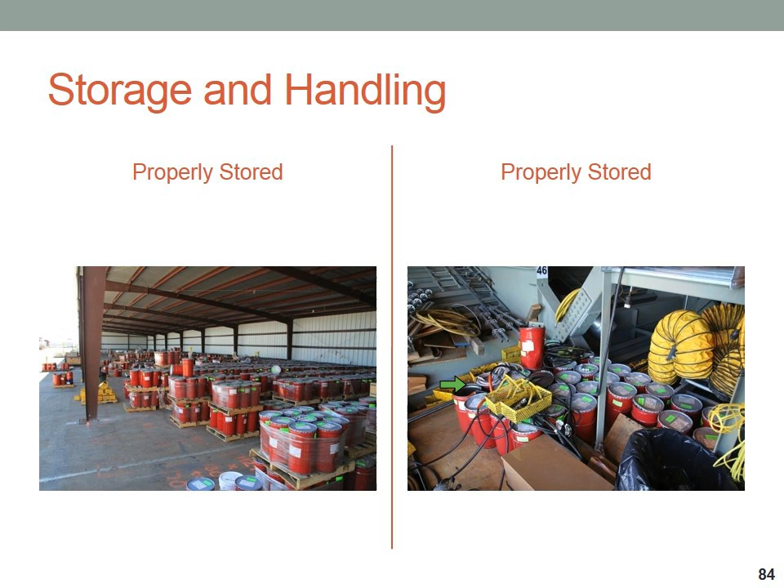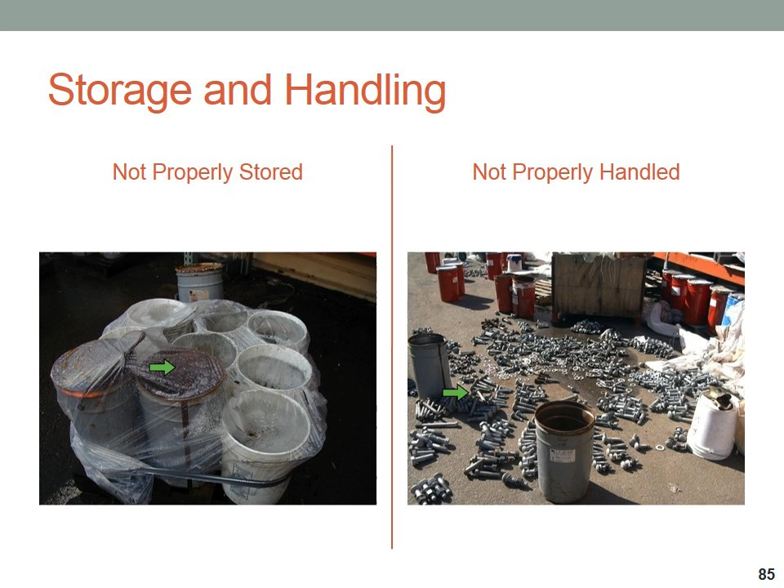Pre-installation testing - when bolts are required to be tensioned, some pre-installation testing needs to be done. That can be as complicated as this particular project, which had some pretty high-end testing equipment, putting a trailer on site specifically to do fastener testing. But it can also be as simple as just having a tension measuring device or a Skidmore available. These really need to be present on job sites where tension is a requirement.

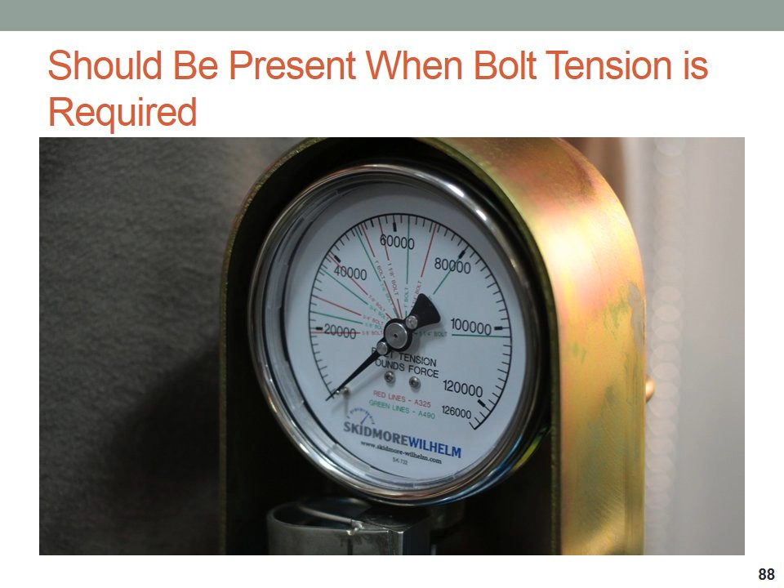Installation methods - rather than spending a lot of time on it here today, go see the RCSC specification pertaining to installation methods. There are 4 that are currently recognized: the turn of the nut, the twist-off bolt, direct tension indicators, and calibrated wrench. I'll let the people that try to sell you each of those try to convince you why you should use one over the other, but the fact of the matter is they all can work very well when used correctly. There are some that have better reputations than others, some that are a little easier to misuse than others. But if you follow the requirements in RCSC, they can all work just as well.

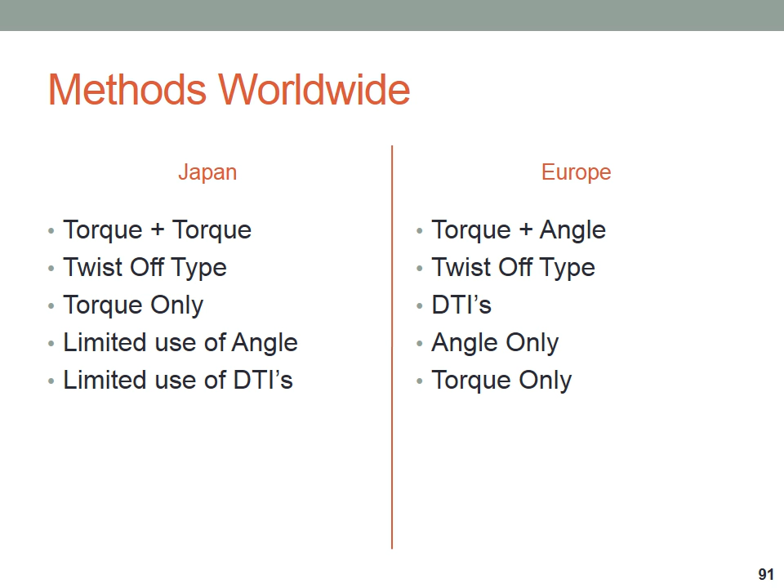By comparison, some other industries use slightly different techniques. Japan, where they have a lot of control over K-factors and tend to trust in torque a lot more than we do, actually uses torque plus torque - a certain level of torque for the snugging operation and then another level of torque for final tension. In Europe, they use torque plus angle. They use twist-off bolts, DTIs. They use some angle and some torque-only methods. But worldwide, this changes a little bit.

What's important to all of those methods - you'll see wording to this effect in RCSC - is that there's a snug tight as it pertains to a snug tight or a bearing or a shear-type connection, but there's also a snug tight as it pertains to achieving tension in a slip-critical or a fully tensioned connection. RCSC has always really struggled with trying to define snug tight, and it's important to read these definitions, try to get your head wrapped around them. I think what's important is just understanding that the snug tight condition is the point where the plies are in firm and nearly continuous contact, that the bolts have at least some level of pretension.

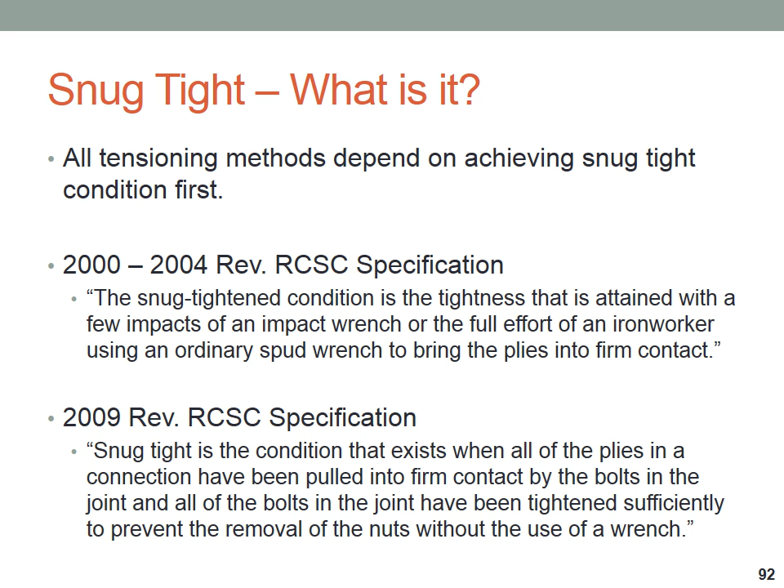It's really important with the turn-of-the-nut method, for example, that you're not using up some of the turn that you think is developing tension to simply pull plies together that are not in contact. What we tend to see is that snug tight has no control whatsoever. We often see bolts that are snugged with a few impacts of a wrench to beyond minimum tension, and we see bolts that are snugged in one continuous operation and then not snugged a second time, and bolts have loosened around bolts that were subsequently tensioned. Snug tight is a thing that's really sort of horribly controlled and neglected in our industry, but really it is going from this condition of some gap in the plates or the plies to a fully compressed joint, and that needs to be done before any of those approved installation methods can be used properly.

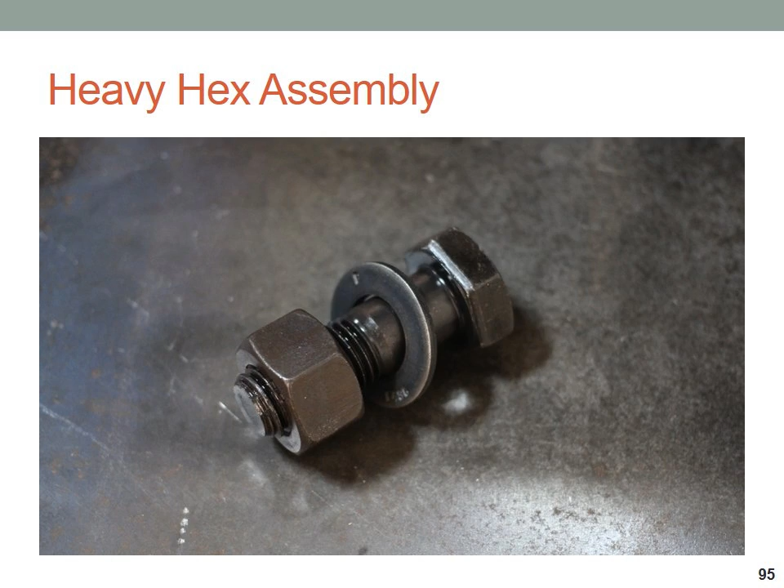Typical bolt that you would see at a lot of projects, a heavy hex assembly. For years and years, this was known as the de facto installation fastener type. They are used a lot in shear or bearing type connections.

They are used in a lot of tensioned connections, which include the turn of the nut method, essentially tension by elongation. And they are used quite a bit in the calibrated wrench method, tension by calibrated torque.

Honestly, when we see the calibrated wrench method used, the calibration is, in many cases, just the iron worker thinking the bolt is tight. We don't see a lot of companies actually doing the calibrated wrench method correctly.

There are a handful of erectors out there that do it very well and do it very regularly. But in a typical small project without a lot of oversight, a lot of bolts are just going into connections and ratcheted with an impact wrench until the iron worker thinks it's tight. That's his version of the calibrated wrench, and that practice is what gave that method a bad name for a while. But when it's used correctly, it can actually be used pretty well.

Hex bolts are also used quite frequently with DTIs, or direct tension indicator washers. Those essentially function by measuring tension by compression, a calibrated amount of preload required to compress the bumps on a washer.

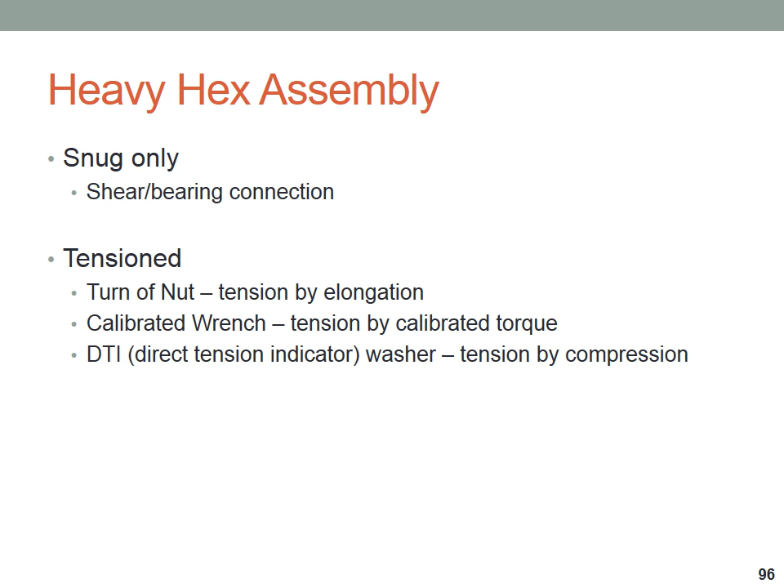One thing I recommend for all of those methods is getting away from impacting tools. There are a number of companies throughout North America, throughout the world in fact, that sell non-impacting and non-reacting tools. They're quite a bit quieter. They save, particularly in coated fasteners, they go a long way in preserving the integrity of the coating, so it's not all getting impacted or beaten off.

There are a number of cases where we have had customers call and say, hey, we're working on this project, we don't even know whose bolts these are, but we're missing the galvanizing on all the corners of the bolts. They send us samples, and we look at it, and we may send them off to do an adhesion test, find out the adhesion is fine, but it's the severe amount of impacting that causes some of that damage.

If you're going to go through the effort to specify the coating, if you're going to have people do oversight to see if the thickness is correct, if you're going to do rotational capacity testing, measure fastener tension, and then have all of that wrecked by having some guy out there just knocking away on it with an impact wrench, it's all sort of for nothing.

So be familiar with and use some of the technology that's out there. These tools are lightweight, they're non-reacting. They can be used with virtually any of the systems I just mentioned, the DTI washers, the turn of the nut method, the calibrated wrench method, and we recommend doing that.

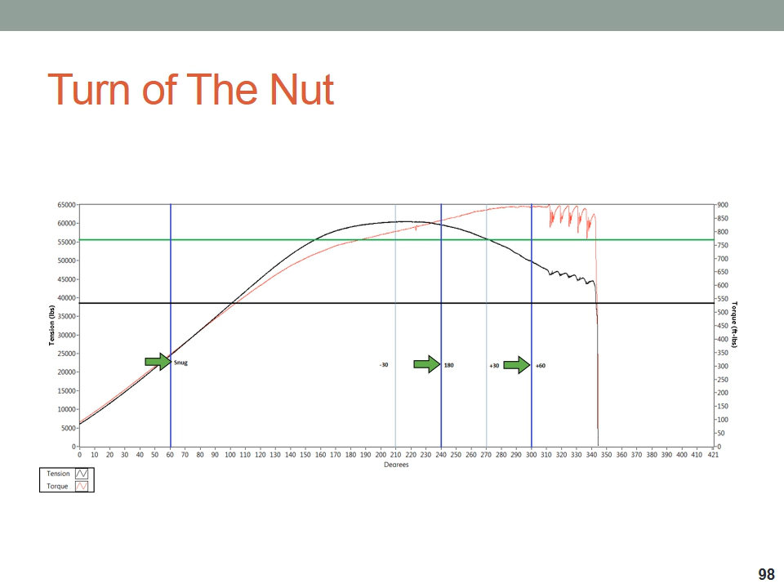So there are some downsides to the turn of the nut method, even though it's very tried and true. It's a great low-cost method of installing, but there's a better way out there, and that has to do with controlling that snug.

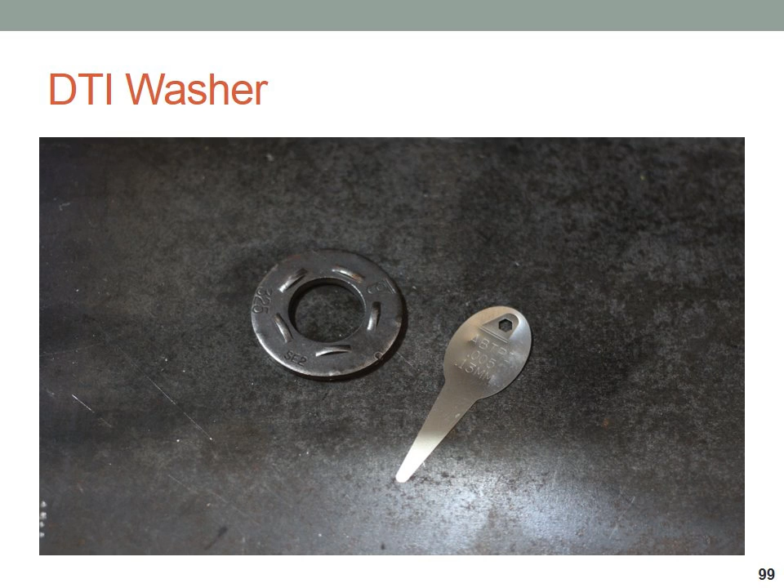DTI washers, again, these are the washers I mentioned that function on compression. They're available in a couple of varieties: standard washers that measure gap, and a squirter type washer that has a silicone that emits from the sides when tensioned. Those are typically used on heavy hex bolts, and occasionally put on tension control bolts. They can be placed under the head or under the nut, and again, one of the 4 approved methods that can work well if used correctly.

Twist-off bolts, I think most of you are probably familiar with that. These are essentially bolts that provide for a single-side installation. They provide a visual indication that at some point there's been enough torque reaction, or hopefully enough tension developed based on that torque-tension relationship, that the spline shears off. These essentially work on what we called before, calibrated torque. The bolts, nuts, and washers are sold as matched assemblies and have a very controlled K-factor or range of friction they operate in.

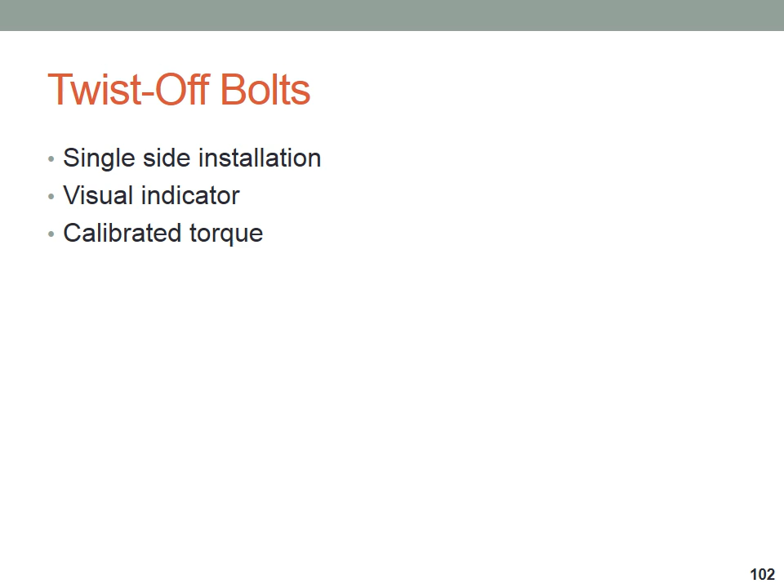And if used, stored, and handled correctly, they can be a very good way to tension structural bolts as well. Here's a quick example of a bolt in its snug condition: you put the wrench on, pull the trigger, the outer socket rotates counter to the inner socket. All of that torque is taken up in the spline, and when that level of torque is reached, the spline automatically shears off. These are available in non-impacting, non-reacting tools, both in pneumatic and electric variants.

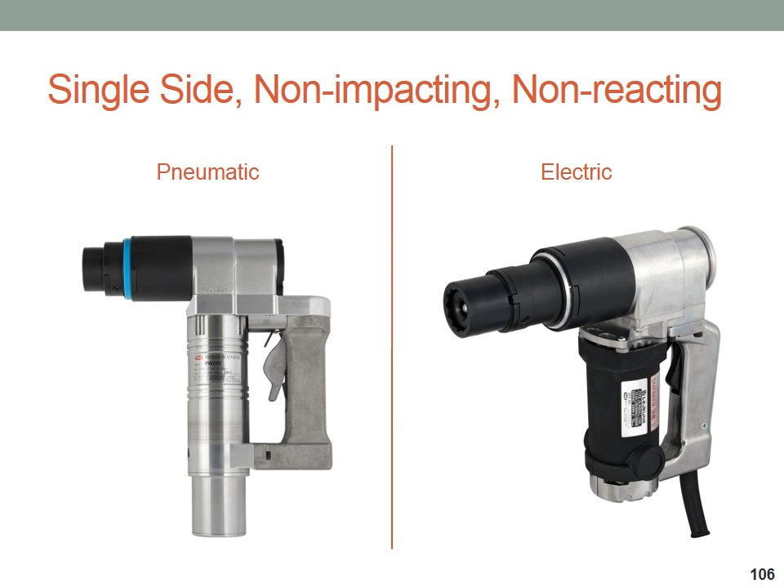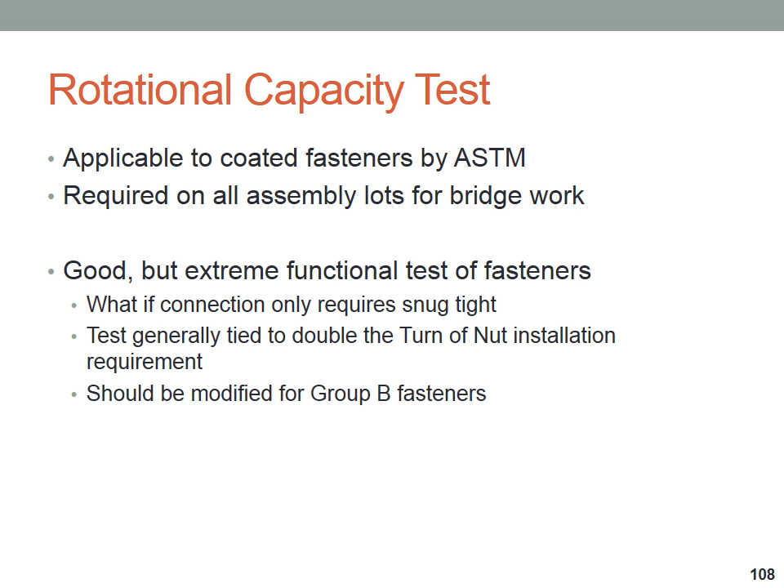Rotational capacity test is an important thing to understand. I had hoped to have enough time to cover this in detail today, but I'll just provide you with this information. There are sources, including myself, that can give you additional follow-up on rotational capacity testing. It's in a bit of a state of flux right now, with some proposals to try to change this test. But if you read through this information on your own time and make sense of some of these graphics, it will help in understanding that test and its value to the industry.

So getting ready to close up here, some unusual aspects of structural bolting. Bolts are tensioned well into yield very regularly. This is sort of a no-no in every other engineered fastener application. It works well for our industry, it works okay, but there are some limitations to that.

In very many cases, our bolts are not sold as matched sets, which is again nearly a requirement for every other type of fastening industry. We intentionally have thread lengths that are very short, yet we know bolts perform better with longer threads. So we're designing out of it all the best criteria for a well-performing fastener to meet our requirements. It's a little counter to what might be good engineering practice—for steel, it's not good engineering practice, unfortunately, for fasteners.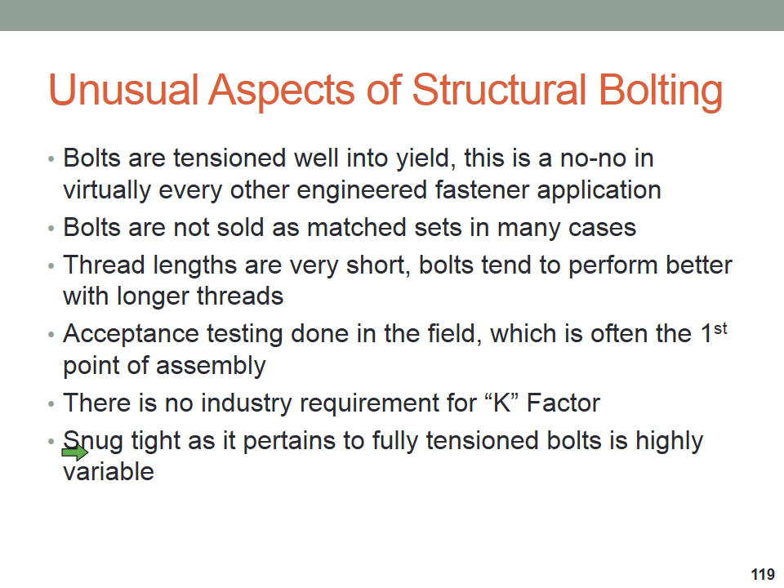A lot of our acceptance testing is done in the field, which is often the first point of assembly, and that's a little backwards—our industry will need to address that moving forward. We have no industry requirement for K-factor for assemblies, unlike many other established structural industries that have matched sets sold in essentially K-factor ranges. Snug tight, as it pertains to fully tensioned bolts, is a very highly variable element for our industry.

Again, I don't want you running to the hills worrying about problems, but what can happen? I've had direct personal experience with everything on this page. While we say that things don't happen often, if you're in this industry long enough and called in on enough projects to either consult, supply, or take over, you will run into a lot of these.

Not to cause anybody to lose any sleep, but these things happen. We see some of them frequently, some very rarely, but it's everything from fatigue to quench cracks to head bursts to torsional and tension failures to lack of installer training. These are things that can happen at job sites, and there are things you can try to do to help prevent some of these from happening. But ultimately, some of it just comes down to the quality of the parts being sold.

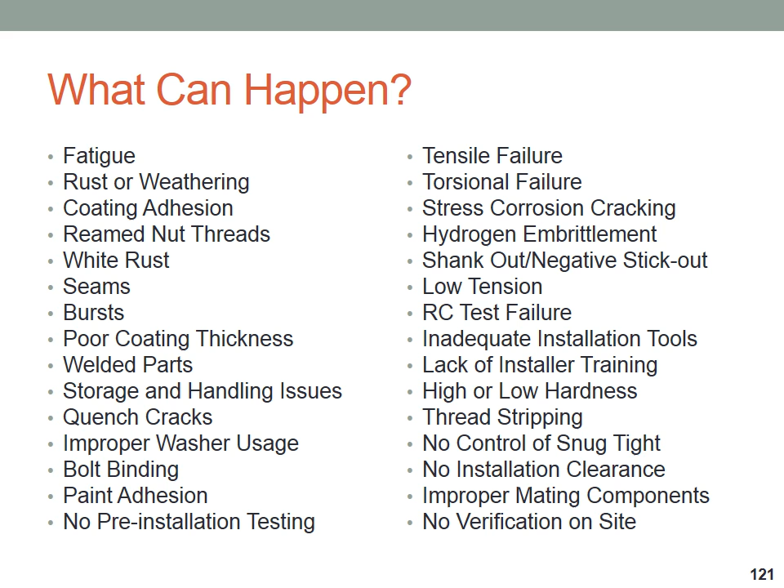What we see quite often are surface discontinuities. There are relatively minor discontinuities that we would call a burst or a seam. A burst is sometimes a seam that opens up, and sometimes just a result of the forming operation. Trying to move steel when it's cold occasionally causes the steel to burst or split open on the periphery. Some people see that and freak out, thinking it's an absolute big problem. In most cases, it is not — it's just a forging surface defect.

We have permissible limits for these established within ASTM on what's a permissible and non-permissible amount of burst. But it can make people uncomfortable when they see it, even though it may not affect performance at all.

There is a difference between a burst and a seam, although sometimes seams split open and turn into bursts. We see them occasionally on nuts, more frequently on bolts. We tend to see them more on round-headed or twist-off type bolts than on hex-headed bolts, simply because a good portion of a hex-head bolt is actually trimmed off as one of the last operations, so a lot of those bursts may have existed and then been trimmed off.

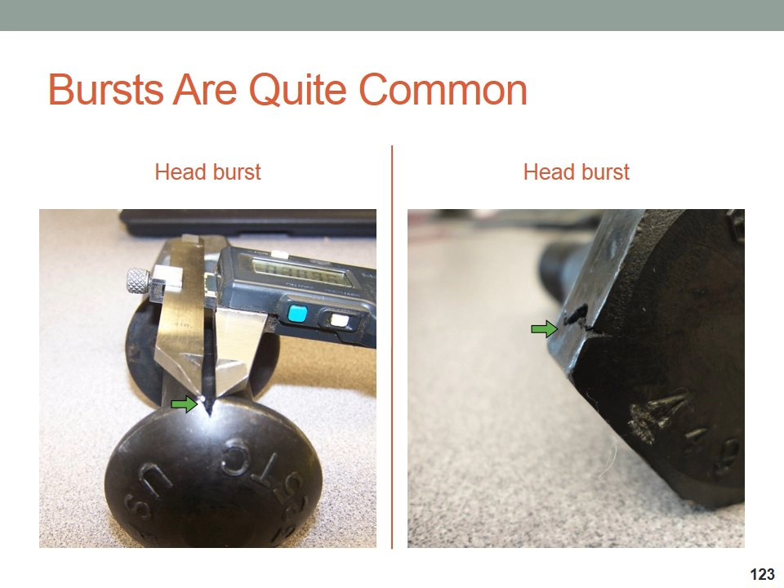In this particular case, all you can do is measure them and see if they conform, but honestly I've never seen a burst so bad that it affected the mechanical properties of a fastener. But I have seen a lot of people get really excited and shut down a lot of projects as a result of seeing them.

Now, you don't want to discount some sort of a seam. In this case, there are seams from the raw material processing on a nut. And in this case, what you might think is a seam on a structural bolt is in fact a quench crack. Seams are not that bad. Quench cracks can be horrible. Quench cracks are not super common, but they do happen. I have a feeling a lot of them end up in structures and are not caught.

We've actually started to see more of them in recent years as A490s are starting to get coated. This particular example is an A490 that was coated. I don't know that this crack would have been identified visually on a black fastener, but since it was coated, it happened to get caught by our QC people here on receipt inspection, and we ended up having to segregate and scrap that entire lot.

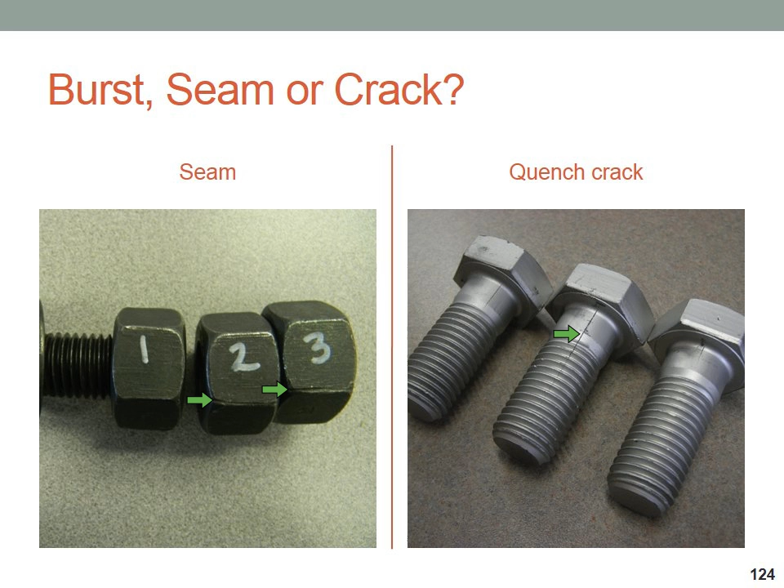They happen as a result of a severe quench, often of a high hardness alloy material. Again, there are no doubt thousands, if not hundreds of thousands, of bolts with quench cracks in structures around the country, but typically not in high enough quantities to affect a particular project. We don't see them often on nuts, but they can happen occasionally, and occasionally they don't run longitudinally — we see them as a result of laps or thread laps in thread rolling, for example. In this case, this black area is the depth of a quench crack through the root of a thread.

Other problems we run into: trying to pull thick plies together without full engagement, reported as a thread stripping problem, everything from counterfeit bolts to defective material. In fact, ultimately it ends up just being not enough engagement to support the load.

One time we had a problem brought to our attention, wondering if the zinc was properly adhering. We found out the zinc had really good adhesion, but in trying to fully tension this bolt from the head side, the connection had slipped so much into bearing that they could not even turn the bolt to generate any tension. It was simply bound up in the steelwork, and through all kinds of ratcheting and hammering away with an impact tool, they basically drove all the coating off of the corners of the threads.

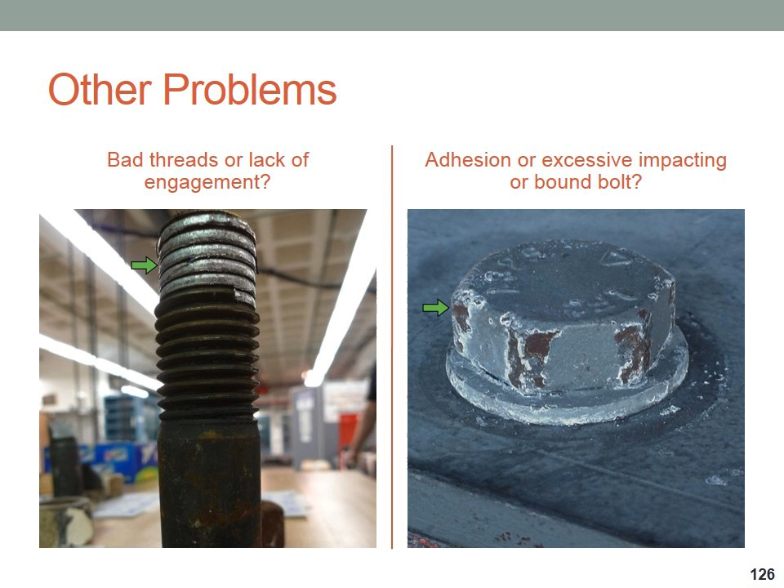Again, could have been avoided if they had understood the benefits of hole size in that particular case, making sure there's not a bound bolt so they're able to generate tension. And in this case, maybe using a non-impacting tool could have saved some of that coating.

We had a customer last year come to us and say that some washers they were using were too brittle and they were cracking on installation. They sent us samples and we couldn't figure it out - I'd honestly never had a washer crack in my experience. Through some additional investigation, we found out they were putting inch series washers on metric fasteners simply because they fit. They got them mixed up at the job site, and the radius underneath the bolt head was putting so much outward pressure on the washer that they split. Once they realized they had mixed up some components, that got fixed quite quickly.

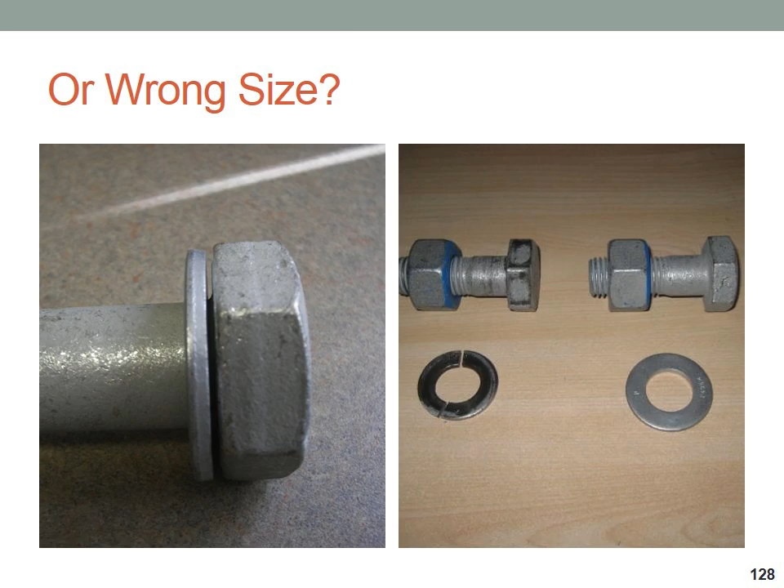Other things you might see: tool marks on hot form bolts, for example - perfectly acceptable, perfectly compliant with the standards. Burnishing marks or fixture marks. Sometimes we get thread stripping as a result of reamed nuts in the tapping operation.

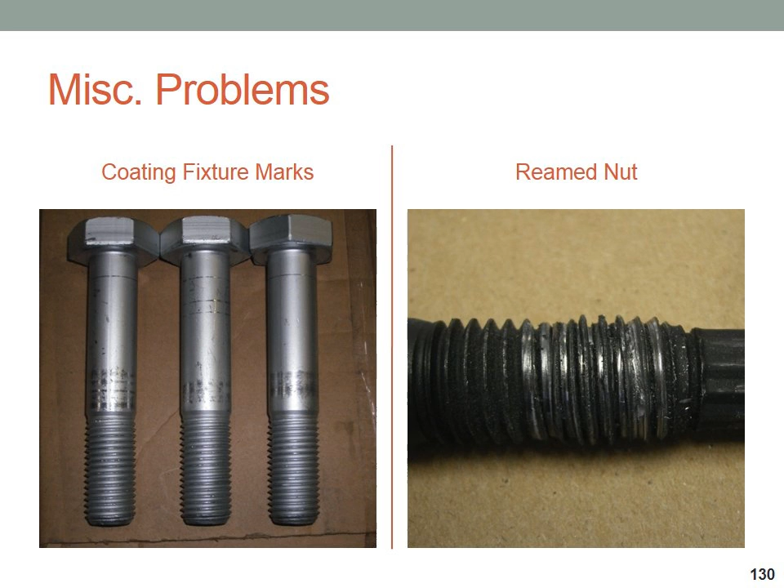We're seeing more and more people that for whatever reason are installing bolts from the head side, and sometimes they are completely twisting off the bolt heads, again because of the bearing or the friction in the hole on the body of the bolt. Once in a while we see something like this, which is just hard to explain - that got through so many levels of engineering and QC and ended up like that.

We see overtension a lot, in particular with some coated fasteners now that have very slick lubrication properties. We see bolts coming out of connections that have trained installers - they've been match marked, they've been witnessed, they've been signed off, they didn't break. We consider them a good installation. But in reality, we've already lost partial stripping on these first couple of threads.

Actually, a better way to look at it is this would be the depth of engagement for the nut if it were still installed. Essentially stripped the first thread and a half, haven't done much damage to the threads farthest from the grip. But we're seeing a lot of galvanized fasteners with really effective lubricants being installed to that condition.

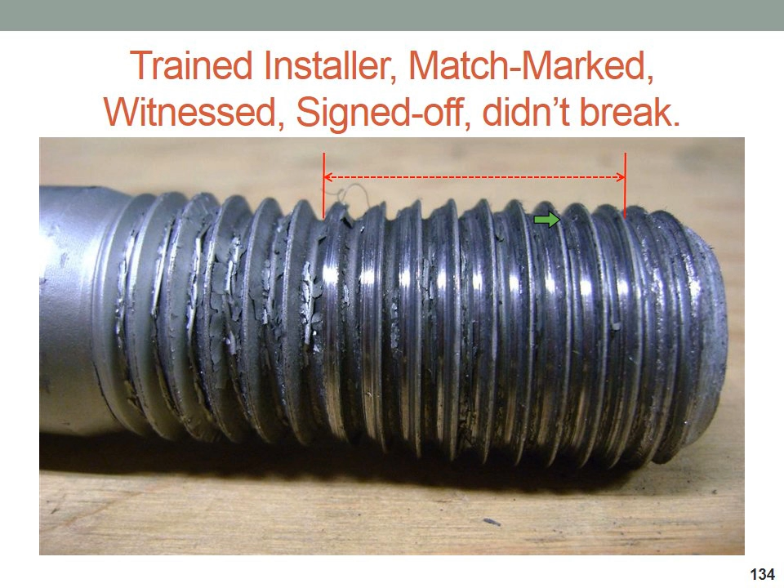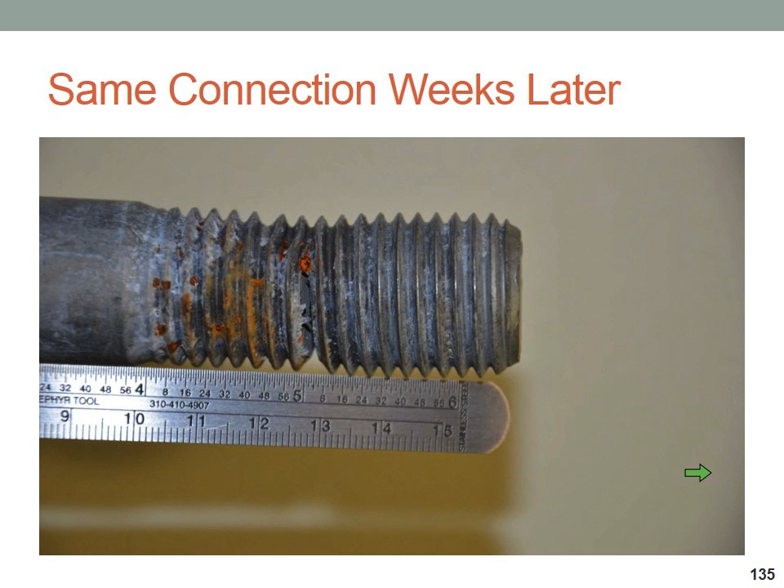Now that we're using coatings on A490, we've seen some very limited cases of stress corrosion cracking as a result of that high level of tension creating micro-fine stress cracks in the thread roots, which are then susceptible to a sort of delayed fracture or stress corrosion cracking. That's one of the downsides we're starting to see from some of the coated high-strength fasteners.

Aside from that, what else can you do? Get additional training. If there's a few things you picked up on in this presentation that you're interested in, find a way to get more information - a number of options are out there. Get more familiar with the standards. Ask questions of those above you in rank and above you in age, and those behind you who have maybe just learned something new.

Ask questions. Get involved in committee work. There's no reason not to be involved in RCSC or ASTM and become more familiar with some of the standards. Work with reputable contractors and suppliers—that goes a long way. And I think last but not least, be willing to work through problems. Again, projects move forward, and engineers that really know their stuff understand when they can compromise and when they can't.

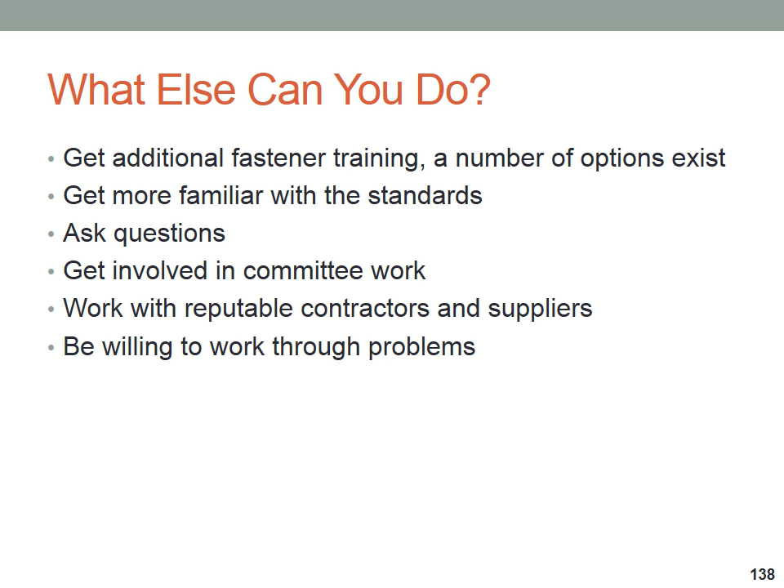So that's it. I know I covered a lot of ground in a short amount of time, and in part that was to show how much there is to know about nuts and bolts. But in particular I hope you picked up on the torque tension angle curves, what that means to fasteners, what threads mean, what that means for coatings, and again sort of a brief overview of the installation methods. And with that I'll end it and turn it over for any questions that we might have.